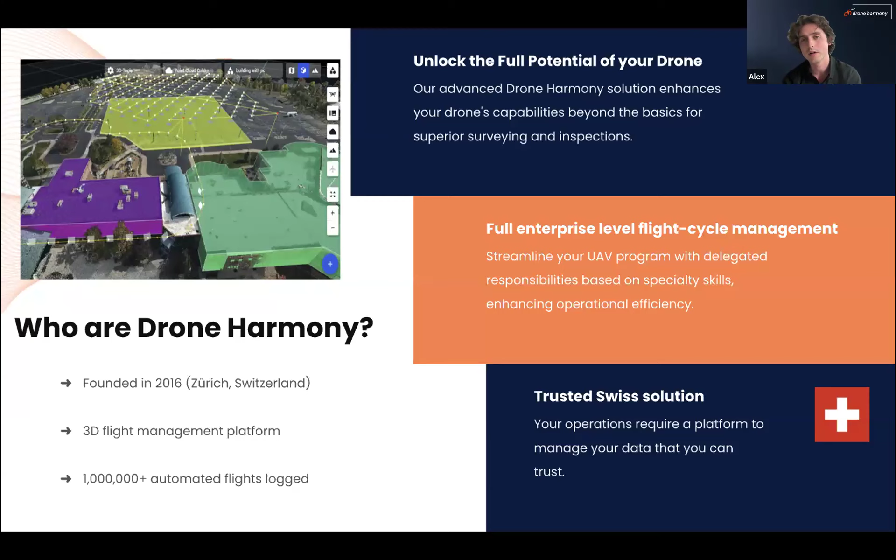We empower all sorts of industries as a software platform. Some of the larger ones we do are utilities all over the world, things like electrical transmission line scanning. We can cover large scale and complex mission planning and also asset inspection. Asset inspection, as some of you will know, is a very delicate thing to do.

These are very sensitive sites, which is why you require a robust platform like Drone Harmony to map them with. Of course, there are many other industries that we cater to as well, such as solar power inspection, construction, mining, public safety, and security inspections.

Now, we haven't gotten to this place all on our own. There are many partners which we use to get here, technical partners and commercial partners. For example, we have DJI, Phase One, Sony. These guys we work very closely alongside with to make sure our product is up to standard with all the latest features and hardware out there.

And we have commercial partners all over the world, and this list of commercial partners is growing by the week. Many, many, many growing in the US, Europe, and the rest of the world as well.

So today, the hardware that we're going to show you is the DJI Dock. Now, as I said at the start of this webinar, there's been a lot of excitement over the last few months about the DJI Dock. I'm not going to tell you any more about it than you've already heard.

The DJI Dock, as a piece of hardware, is changing the drone industry with software platforms like Drone Harmony. The drone industry has been going for around 10, 15 years now. Finally, we have a platform that allows you to have full remote work control of your operations. This is a dock where you can activate and perform your missions 24/7 remotely using platforms like Drone Harmony.

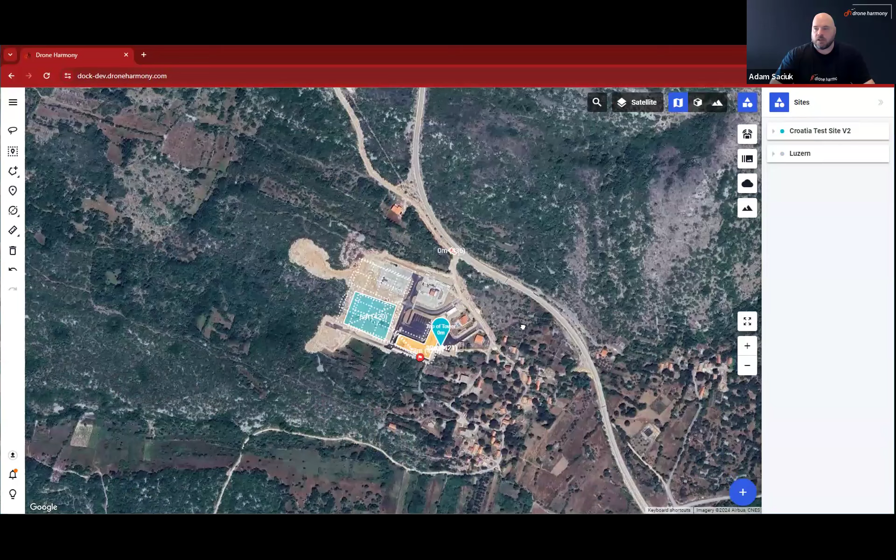So I will zoom in on our Croatia site here, where we come in and see a few different things. I will close down some of these missions and talk about the basics of what planning is.

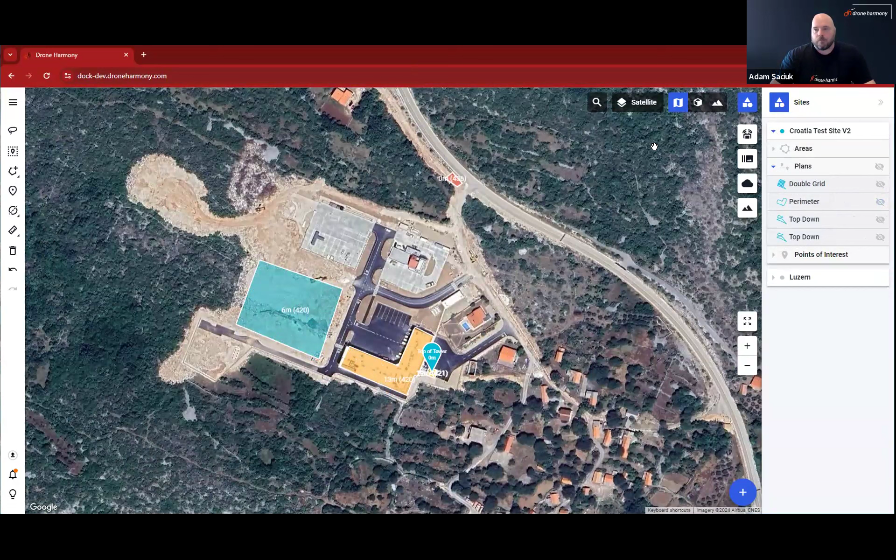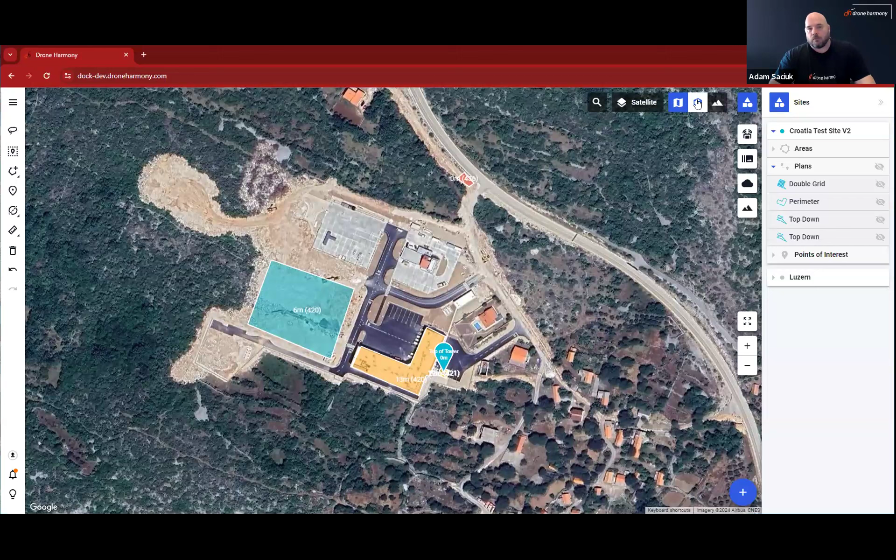Fundamentally, we have our 2D world, which exists on kind of the Google map. It's the same as what everyone has the ability to use. In Drone Harmony, we wanted to go one step further. We were the pioneers of 3D flight planning. So we brought in the virtual world, which leverages technology that's becoming cheaper and cheaper to achieve: point clouds, orthomosaics, and meshes.

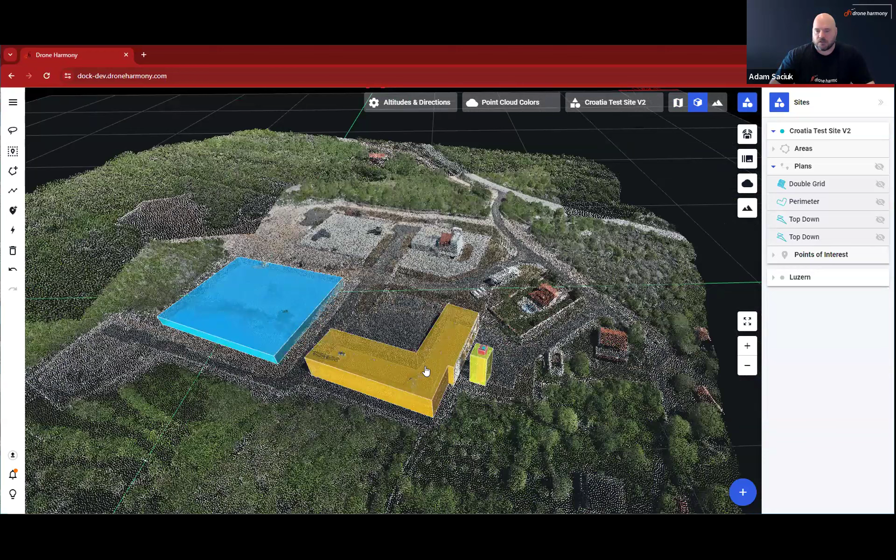So here we have a point cloud of our facility, and Drone Harmony has the ability to create objects in this point cloud. We interact directly in this environment. It's all geospatially accurate. And when we have the dock installed and turned on, we know exactly where it is, so we have our RTK fixed point of reference. The accuracy is all built off equipment that removes the guesswork around where your drone's going to be.

Unfortunately, in this particular scenario today, the dock is not turned on because we have a bit of a torrential storm going through the area, but it won't stop me from being able to show you a planned mission on how you would do this in a virtual environment. I'm quite a long way away from Croatia, but I can operate in this environment like I'm sitting there.

So the first thing that I'll do is create a perimeter mission for this orange building that is there. So what we have done is created a box around that, and we use tools where we create the points of the building. As we go through and create those points, it will draw a shape, and we give it 3D heights.

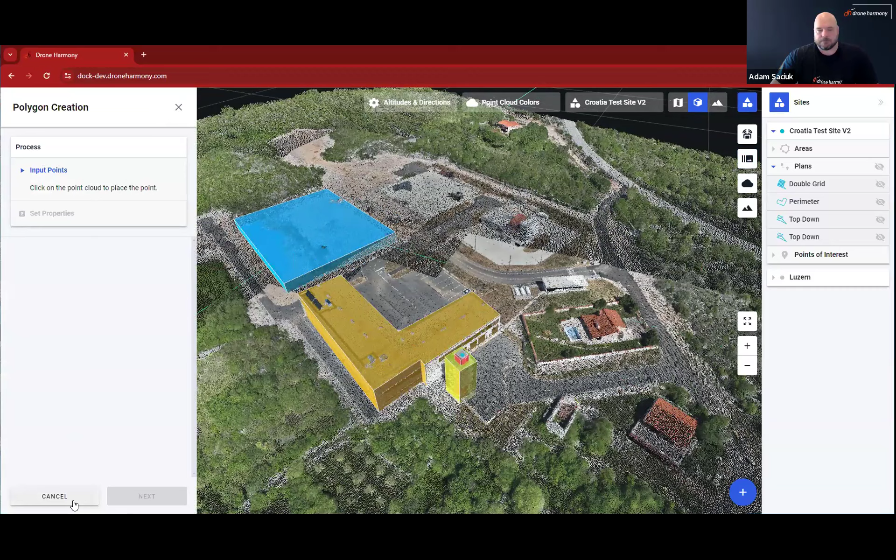So I will close that, and now plan a perimeter mission. In our plan catalog, we have lots of different things: linear missions, shapes, mapping missions, inspection missions. And in this case, I'm going to use a perimeter mission. So I'll pick my orange building.

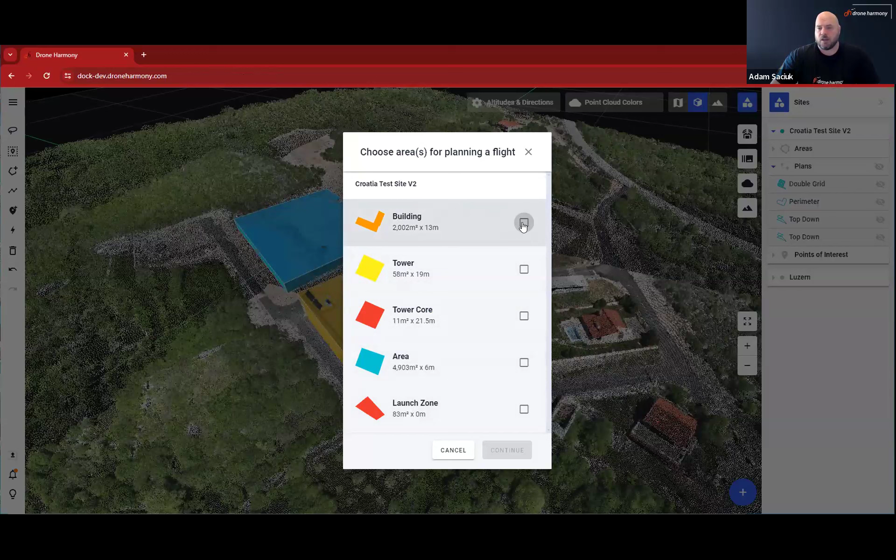These are all customizable. You're able to name these in your own naming conventions. We don't really lock anyone down to a Drone Harmony naming convention; we give you the flexibility to use your own. I'll select that building. Normally, if I had the drone connected, it would know where the drone's going to launch. I know our drone is normally installed over here, so I will just use that as my launch location.

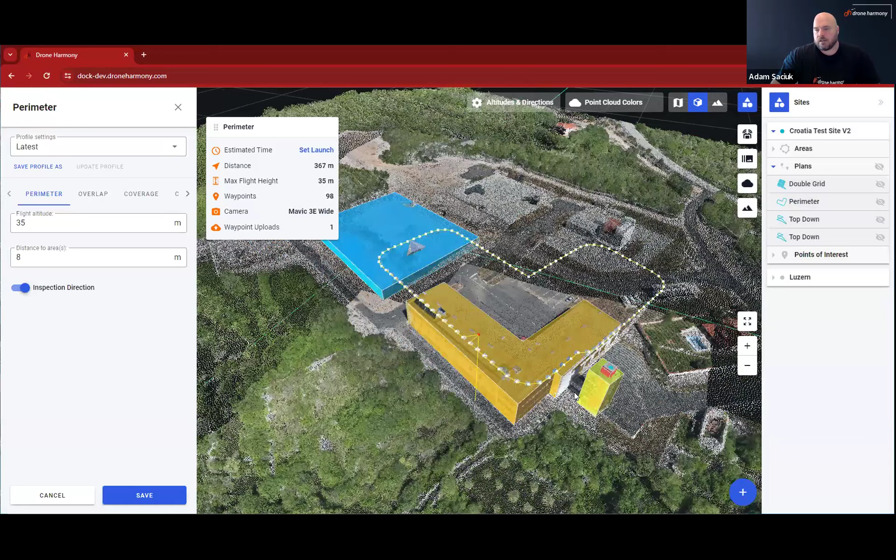And you can now see the algorithms jump into play very quickly, creating a flight mission based on parameters. So I've told it what I'm interested in, and now within 1 second there's a flight mission that shows exactly what we're doing. You can see that the camera is automatically angled. Everything is done through algorithms.

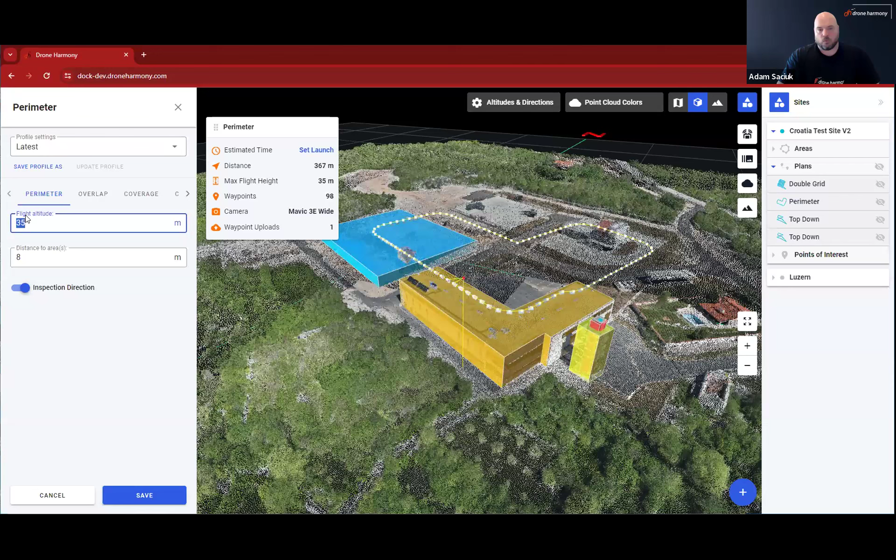So with this type of philosophy, if I drop this down to, let's say, 15 meters, which is probably a little bit low, let's see what happens. We can see that we are avoiding objects here. Hopefully this is coming through on the screen too.

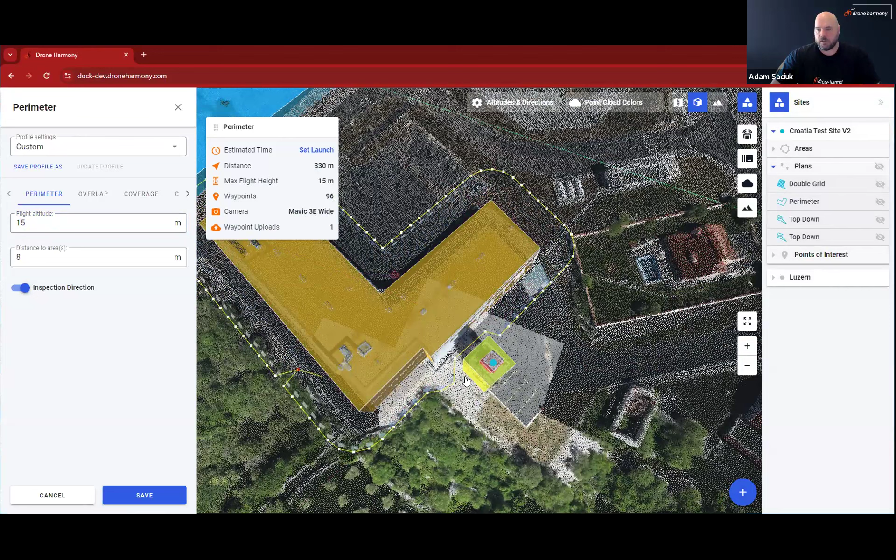You can see what Drone Harmony's done there, in that it's actually avoided that tower obstacle automatically because we had that drawn. Now I can have that mission with the confidence knowing that the drone knows what to avoid. And I can review this in 3D. It's adjusted my visual angle so I can see the structure.

So we'll go back up to a safer height because I think that's maybe a little bit too low, and we might go out a little bit further just to have a slightly better view. So really what we're having the ability to do is preview our flight in the virtual world to make sure that we are getting exactly what we need from this mission. If this is just a normal surveillance mission, when I launch this, I would just use live feed or video. If it's an inspection mission, I'd be taking images.

If I need to change the overlap of the images, we have the ability to do that, and it automatically changes in real time. If there's a part of the building that I don't want to inspect, I can modify that. In this case, I want to do all of it. We can pick the camera that we're actually using.

Because I haven't got the dock turned on, we're reverting back to being able to select this manually. Normally the dock determines which camera and drone we use.

And then we can come in here and start setting launch parameters, which is our flight speed, what I want the drone to do. Do I want it to stop at each waypoint, stop, record video? Which sensors do I want to record? So if I don't want to turn on infrared, and what happens at the end of the mission, and so on and so forth.

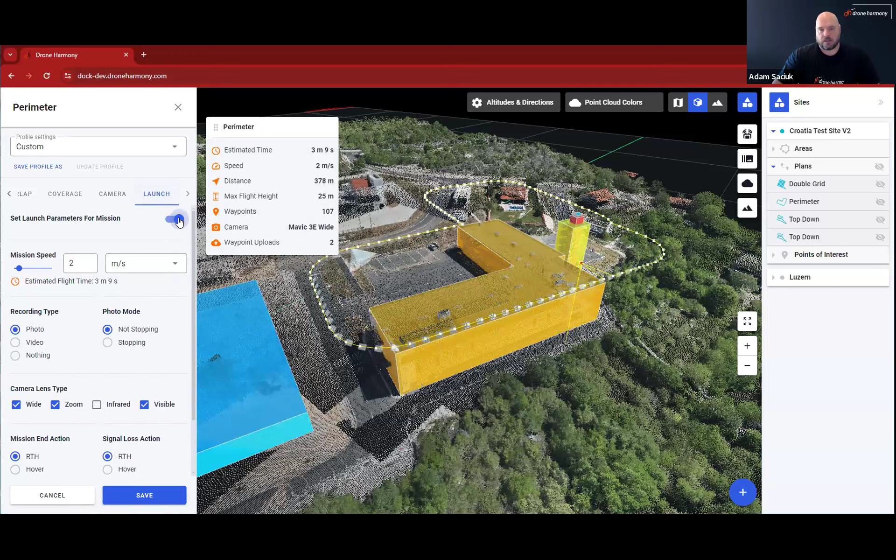So in that instance, I will save that mission and we'll call this perimeter test flight. This is essentially naming, you give it a naming convention based on what is going to be memorable, how your operational team will know what mission that is. So I will save that.

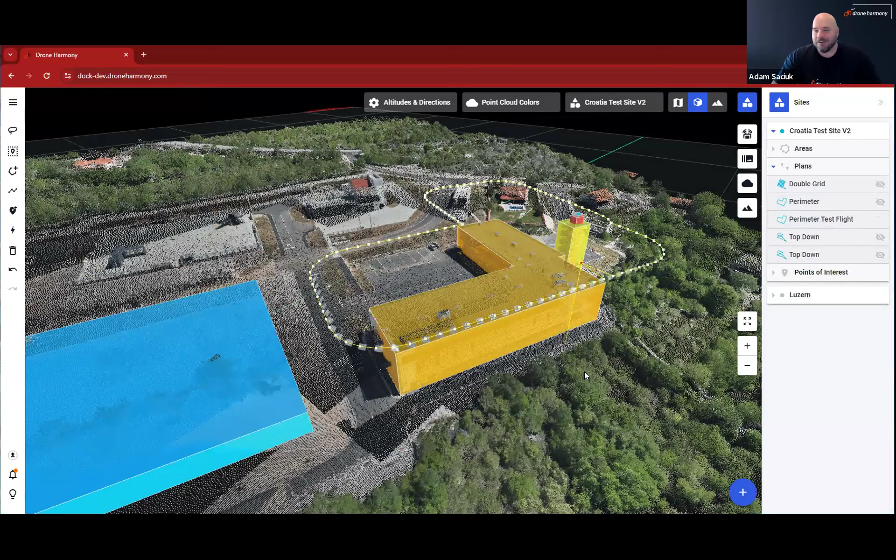And that mission now sits inside our flights, and you can see the perimeter test flight that I just did. The reason why I love this is because it's got a little love heart. It shows how much we love what we're doing there. So that's one of the missions.

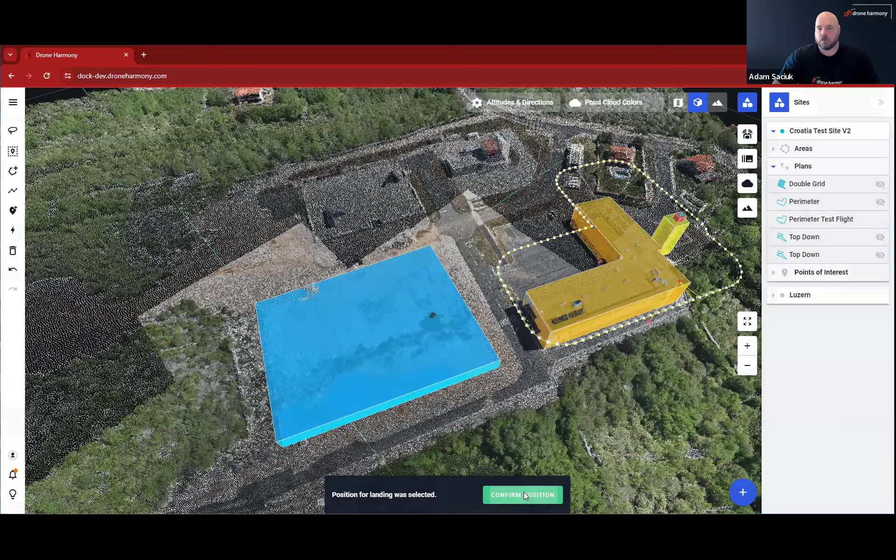Over here, we have another mission, which is just a simulated area of interest. We might just do a mapping mission of that area. Again, we will launch from over in the area where the drone is normally installed. And I'll come down to 25 meters just to make it a little bit more interesting.

And it's integrating, it's creating all of these missions. So again, you have the overlap controls, the camera controls. We can change the pitch and we can schedule the launches for those perspectives there.

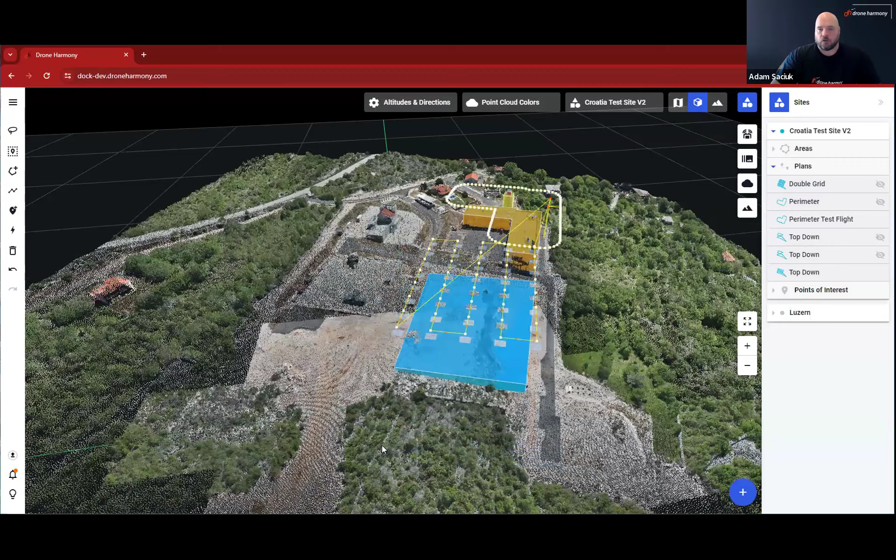So the last mission that I really want to show you before we get into some live demos is how our point cloud actually creates a terrain model. So we have all this great 3D information that comes from near survey grade 3D point clouds.

And Drone Harmony, when it automatically processes this data, you load the LAZ or the LAS point cloud in through our point cloud engine. It will actually create a terrain model in very, very high resolution, showing us where these things are, like light poles. So it's actually creating terrain avoidance obstacles of light poles.

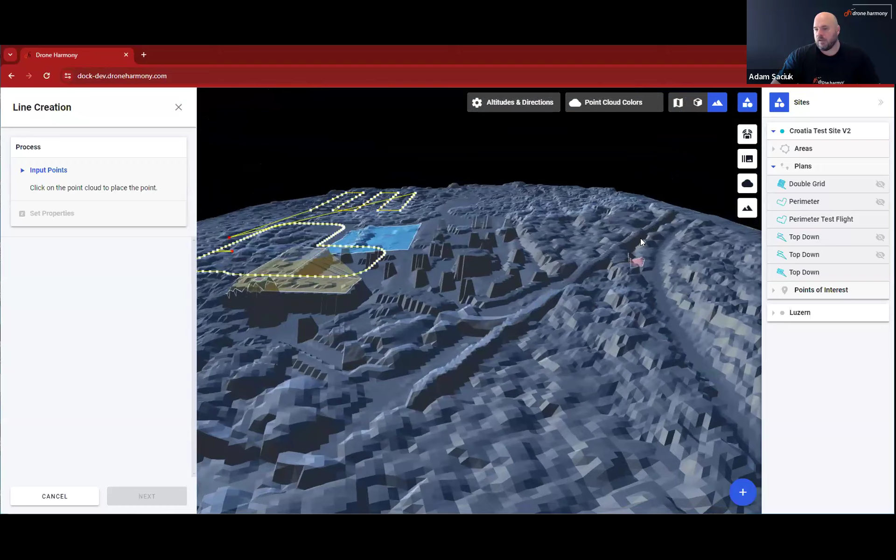We can see there's a transmission power line corridor that runs down there. There's a distribution corridor that jumps off there. So you can see that it's actually created an obstacle world of where all the things are.

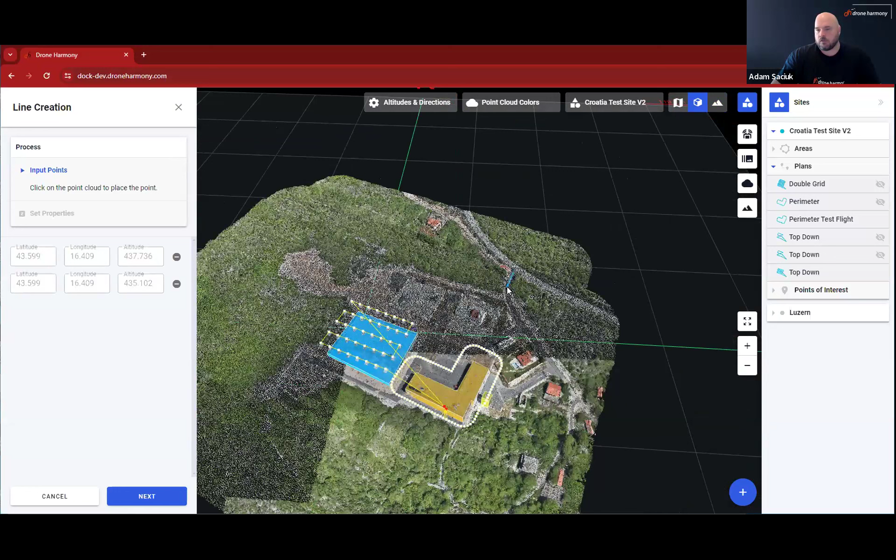So when I jump back into the point cloud view, sorry, it's just taking a little bit to load. I'm going to create a linear mission, and I'm just going to draw it along the point cloud.

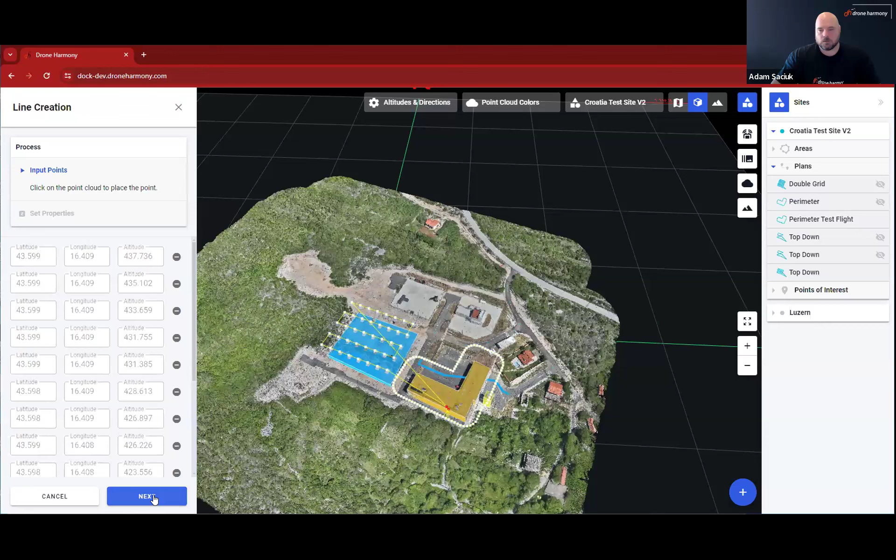I'll go back up here. I'll go straight through the building, and we'll finish over here. Make it red so it stands out. Okay, so that's the mission that I'm interested in.

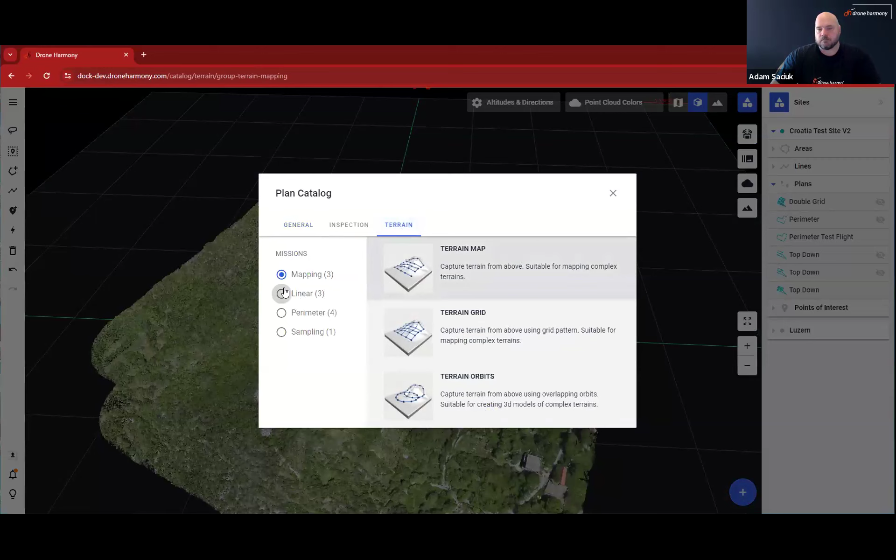I want the drone to fly along that pathway. It might be a road, it might be a perimeter of a building, and I just want to do a terrain flight. So I'm now going to use my terrain data, and I want to do a linear path.

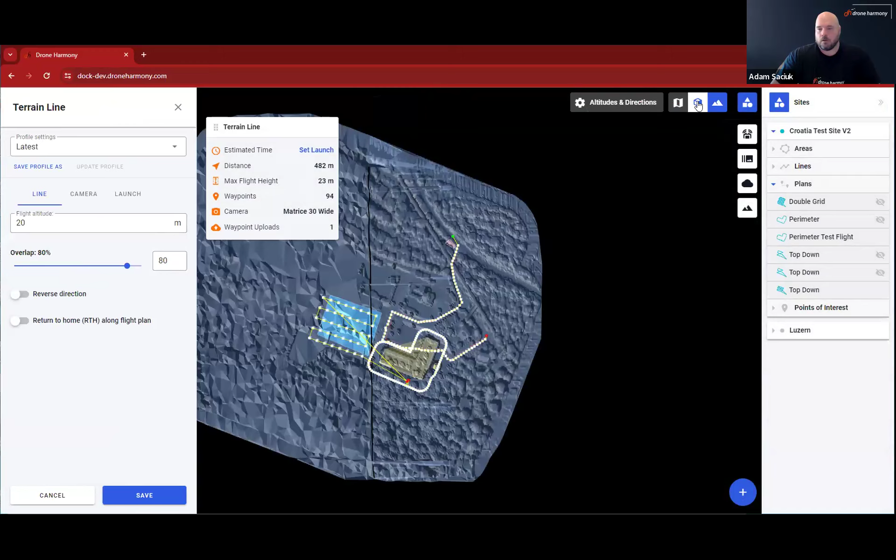So I'm going to launch from over here because it just makes it a bit easier. Normally you would launch from where your drone is installed. And I want to land over there. And I will go back into here, turn my perimeter mission off, turn my top-down mission off.

And I am going to have it a little bit higher. Let's bump it up to, say, 50 meters.

And you can see that the flight path here, as we're planning it, it's using the terrain model to adjust the obstacles. So it's flying over the top of the buildings, even down here where the transmission corridor goes. You can see that it's actually increasing altitude a little bit just to make sure there's enough space operating it.

And what this does, it gives the pilot and the planner the confidence that when you plan a mission, the drone knows the real world as you're flying this.

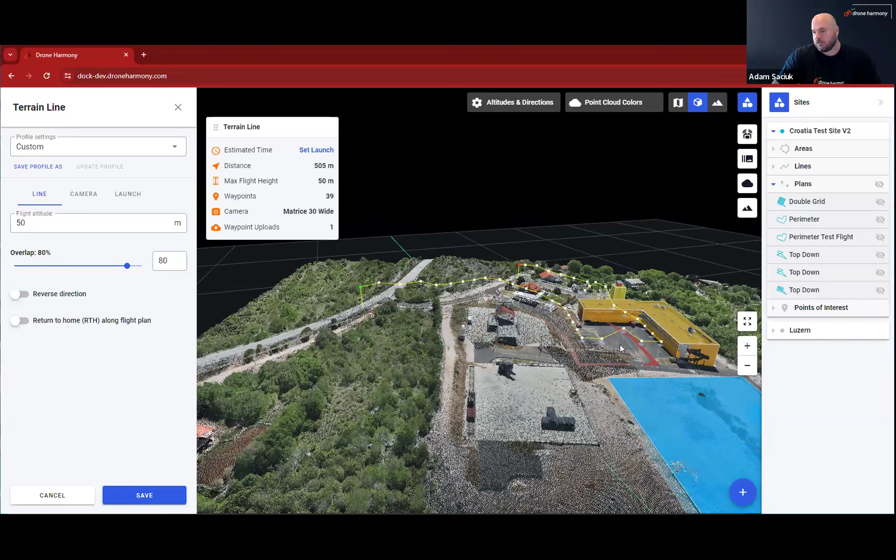This is an interesting one. There's a light pole directly underneath this. So it's just making sure that it flies above the light pole and it's following the terrain that we do there. So if I save that mission...

You'll see how it has quite an odd shape rather than just the straight line.

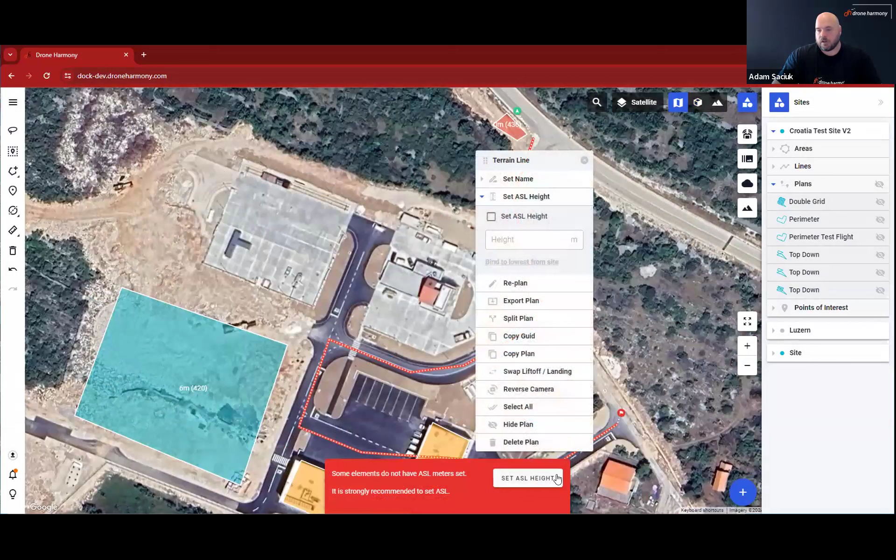And all of this is referenced back into here, and you can start adjusting waypoints as you please from that perspective. So those are the different types of missions that we can do.

All of these missions get saved. They're controlled by a site that sits in an enterprise account, and then they're executed when you've actually got the drone installed. They get executed based on a predetermined schedule or on an as-needed basis, and we'll show all the different functionality of the drone control operations as we step through this.

So, Alex, I think that's probably the basics of planning that I wanted to show. And I think everyone's here to actually see the drone operate and start flying around some of our test locations.

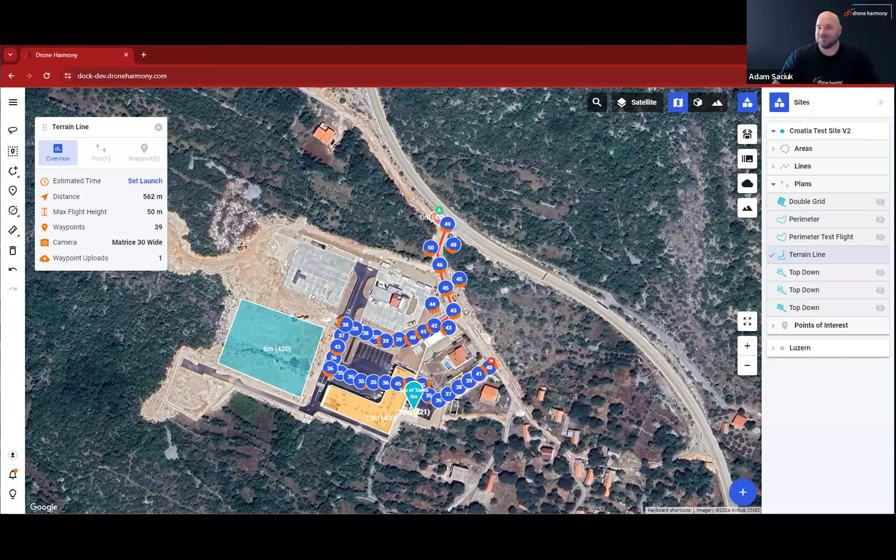That's really neat, Adam. Thank you for that. I've actually got a bunch of questions myself that I want to ask, but I don't want to hold the audience back from seeing a drone flying any longer. So, sure. David, do you want to take over? Adam, did you stop sharing your screen? David, certainly, take over and share yours.

So, as Adam said, the weather is very, very bad in Croatia today, which is part of the risk you run when you try and do an experimental webinar. But that's okay because we've got drones docked in Luzern and in Finland as well, so we're going to be able to show you one of those.

David, do you want to share your screen, please? Yes, with pleasure. I'm gonna pop it up right now. Just give me one quick second. No problem, should come up now. Is this coming through? Yeah, we can see the map of Europe. Okay, sounds good. So yeah, let's do some flights, some concrete flights.

So here is the little site where Adam was showing some of our flight planning capabilities just now. And as was mentioned, the weather there in all of Croatia is not ideal. So we will actually be flying into other sites, one being in Finland, and the other one in Switzerland, in our, let's say, home base.

We'll start with the dock in Finland. So let me switch over to that site. By now we've seen a little bit of how the Drone Harmony interface looks like. We know that in a dock case, we usually have both 2D information as well as 3D information about our site.

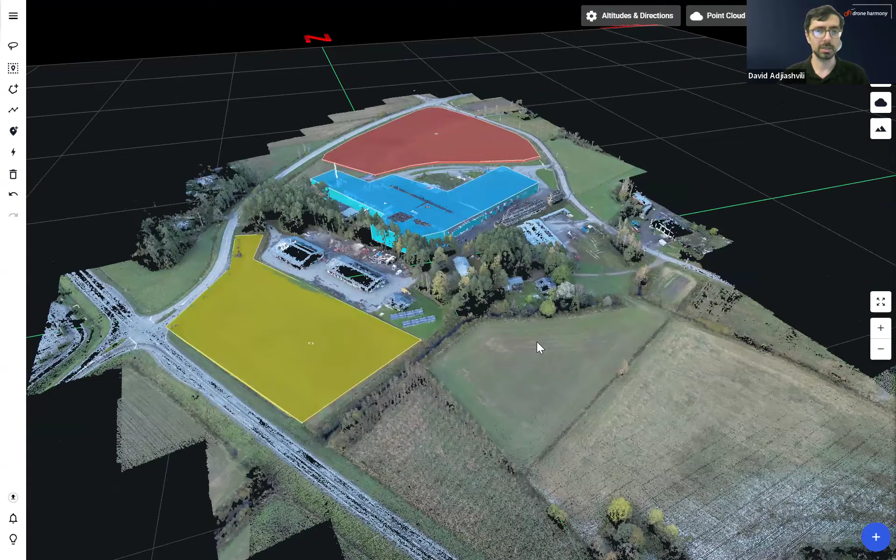So just to introduce you a little bit to this specific site, it's in Finland, and this is where we're gonna do some of our fun flight drone dock flying. I will actually start with planning a new mission, just so we see the whole workflow in this site from the beginning till the end. So just as Adam did before, I'll pick one of the buildings, for example, this blue building, and I'll just plan a quick perimeter mission for it.

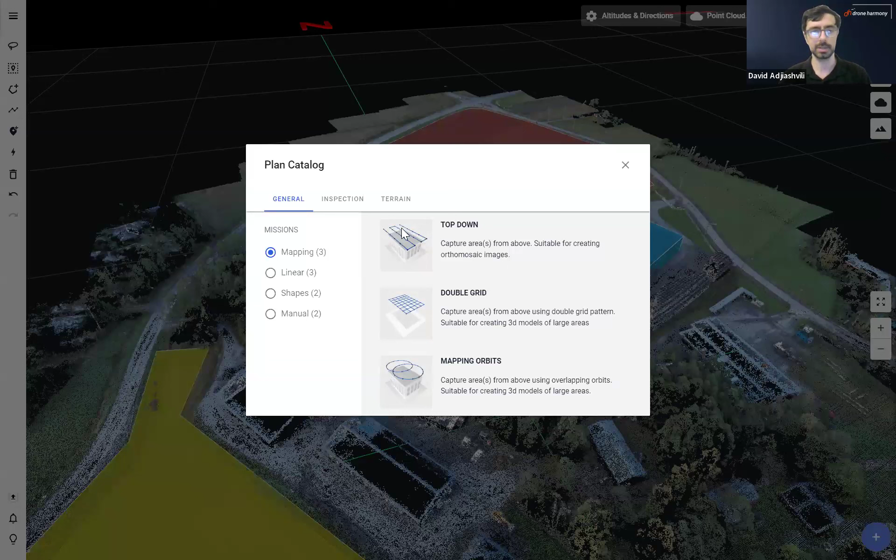So the same workflow: I go to the plus here, I'll pick inspection as a category of missions, and then perimeter. I'll pick this main building as the subject of my inspection and continue. So here, immediately we get a suggestion for an inspection for this building.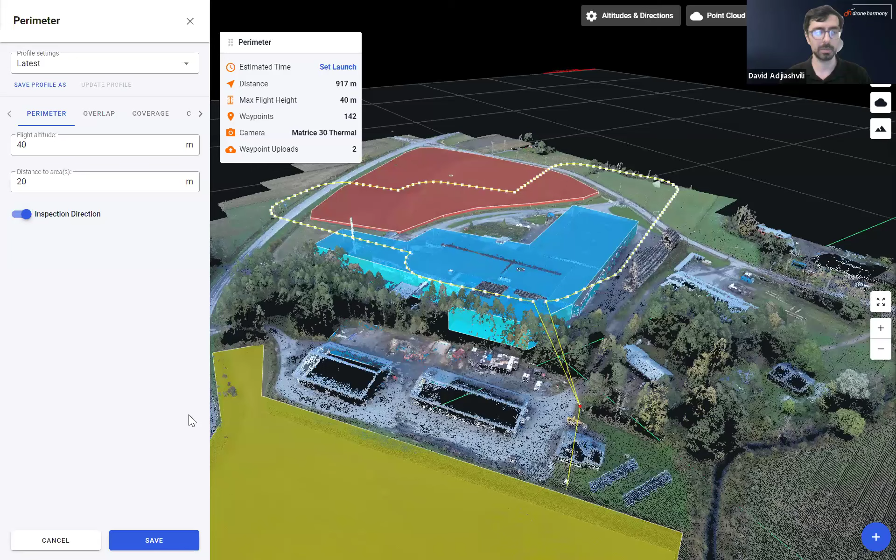You will see how the takeoff location has already been identified, and the reason is that this is a dock site. We have actually a connected DJI Dock here, and the takeoff location is being identified as the location of that specific dock. On the left, we can adjust parameters, flight altitude, distance to the structure. I actually like the current settings, otherwise I would be able to adjust them. I'll just save this mission right now and call it perimeter.

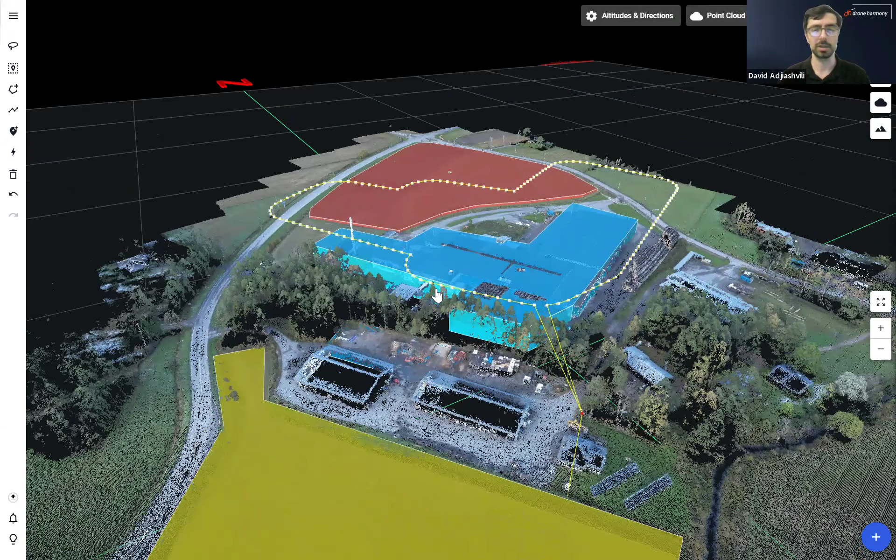So that's all fully automated, isn't it? That mission plan wasn't done in advance - as soon as you hit select, that's coming automatically, hasn't it? Yeah, that's correct. I've actually cleaned up the site before just to be able to do everything from scratch. And if I would adjust anything about the building, it would create the mission according to that new shape of the building, or that new shape of the 3D virtual world that we're looking at.

So now that we have the mission, let's fly it. This is the first time we'll start seeing some dock related elements. There's several ways of launching a mission in Drone Harmony - I'll show you at least a couple.

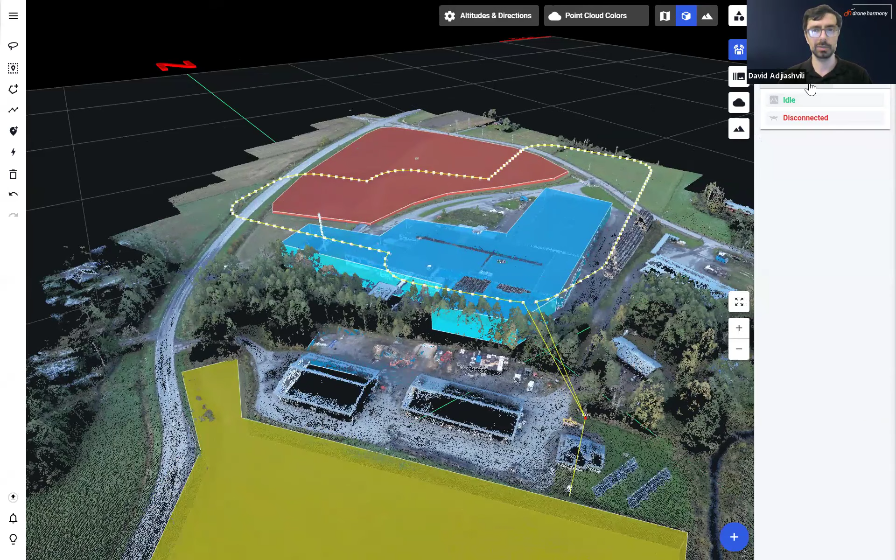So one thing we can do is we can go here to devices and just open the specific device we want to launch a mission from. You can see this little panel here appears on the top right. We can move it around to anywhere in the screen where we want it to be, but this is actually a good position for me right now.

What you will see is immediate access to FPV view. So at the moment we'll look at the dock FPV, and we see a little bit of telemetry here on top. This is actually the drone telemetry. The drone is currently off, so before speaking too much longer about telemetry, I can talk about it while the drone is preparing to launch the mission.

I'll jump straight into launching this perimeter mission that we've just planned. One way to do this is to press launch mission for the specific dock. In this case, I have one mission on the site, so we jump straight into the launch parameters. Otherwise I'd have an option to pick what mission I want to launch, maybe we'll see that later.

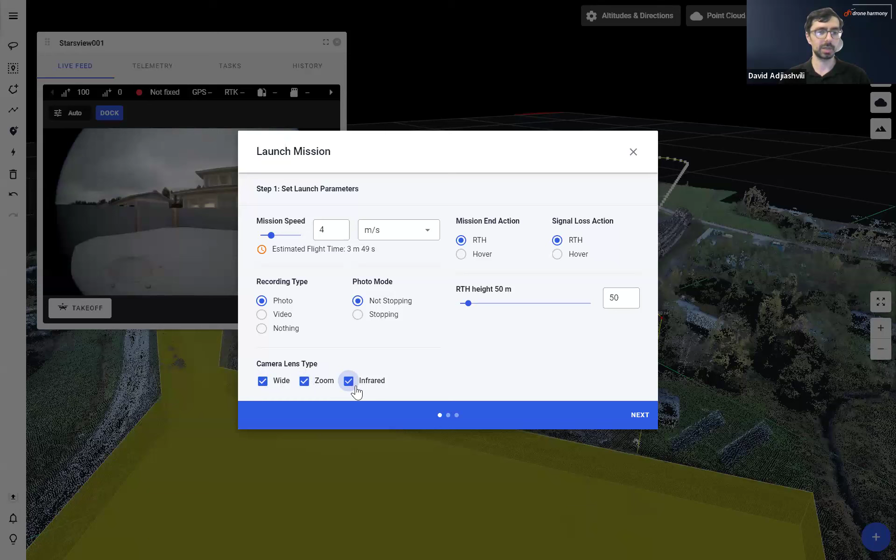Similar to how we could pre-plan parameters for missions, here I can look at whatever was pre-planned for this mission and adjust whatever I want. Mission speed is an important parameter, return to home altitude is an important parameter, as well as what we're actually capturing. So all of the important parameters are in here, for example what image data will be captured. In this case, let's keep all of these ticked, both wide as well as infrared and zoom. If we're happy with the parameters, we go to next.

We pick the type of launch. So now I'll launch a mission immediately, some kind of ad hoc launch as quickly as possible. We could also schedule - if I go down here I could schedule and choose between several options. For example, I want to launch a mission tomorrow at 5pm, or I could schedule daily or weekly on a specific day. So there's a lot of flexibility, we can have several schedules to create any type of drone flight schedule we want. But again, we want to do immediate right now.

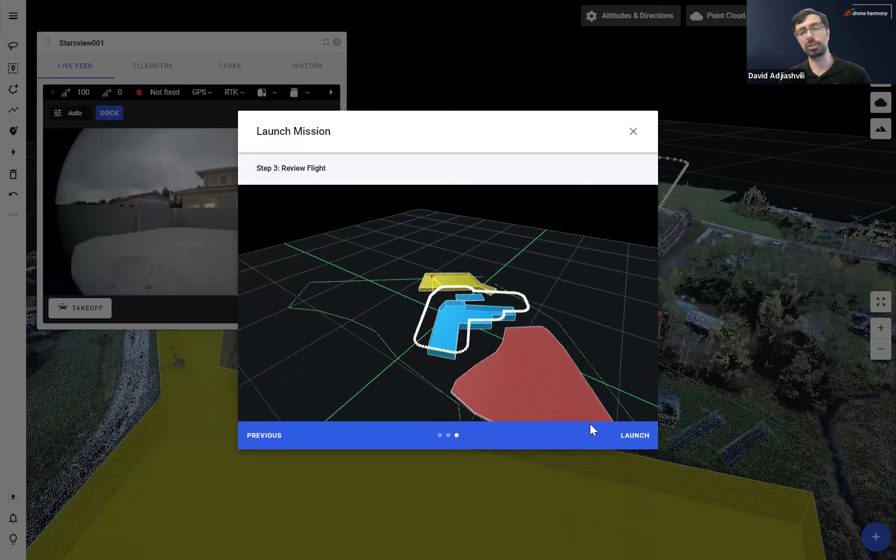Next, I get a quick preview of the mission that I'm actually planning to launch. This is useful because on a Drone Harmony site we very commonly have more than one mission, and we don't only want to rely on naming. Sometimes we also want quick visual feedback that we're launching the mission we're actually intending to launch. So I'll press launch, and now the launching sequence should start.

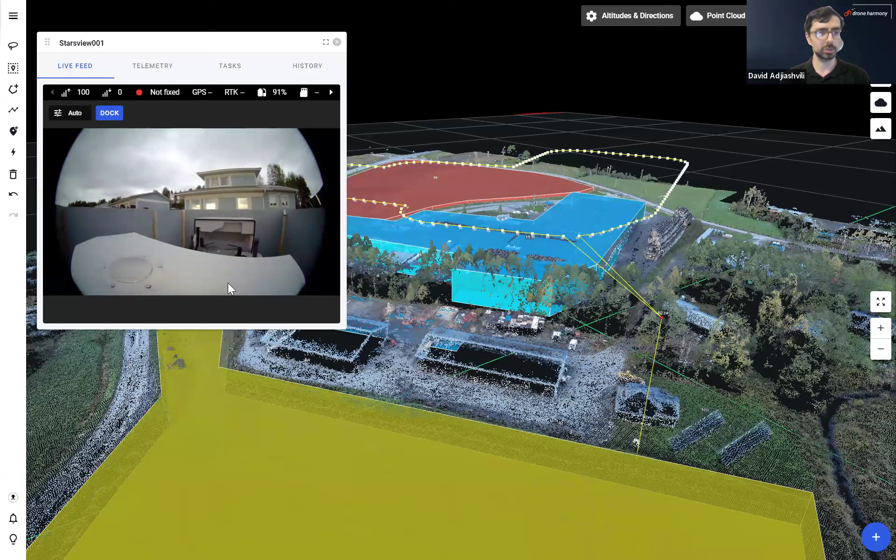While that's happening, I'll continue talking about the dock panel that we have within Drone Harmony. You'll see that the dock is already opening, the drone will start, turn on, et cetera. Those of you who know a little bit about DJI Dock will recognize that this is a Dock 1. We'll also launch a Dock 2 in a few minutes.

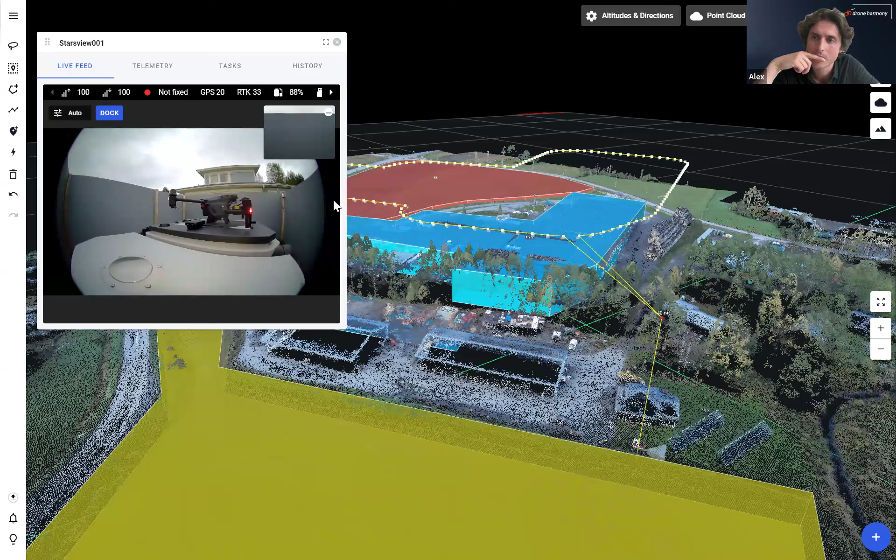Just to confirm this, because I find this absolutely mind-blowing - you've planned this mission on the cloud in Switzerland, and now we're activating it in Finland. So when you've pressed launch, the data for this flight plan has been sent to this dock in Finland. Yeah, exactly how it is. There's really no kind of geographic boundaries here - we could have had Adam launch this mission, he could log into the same account. It really doesn't matter where you're doing it from. You can do everything from loading up the point cloud, creating the objects of interest, planning the missions, launching the missions, viewing the data, everything right here. You don't have to do anything locally.

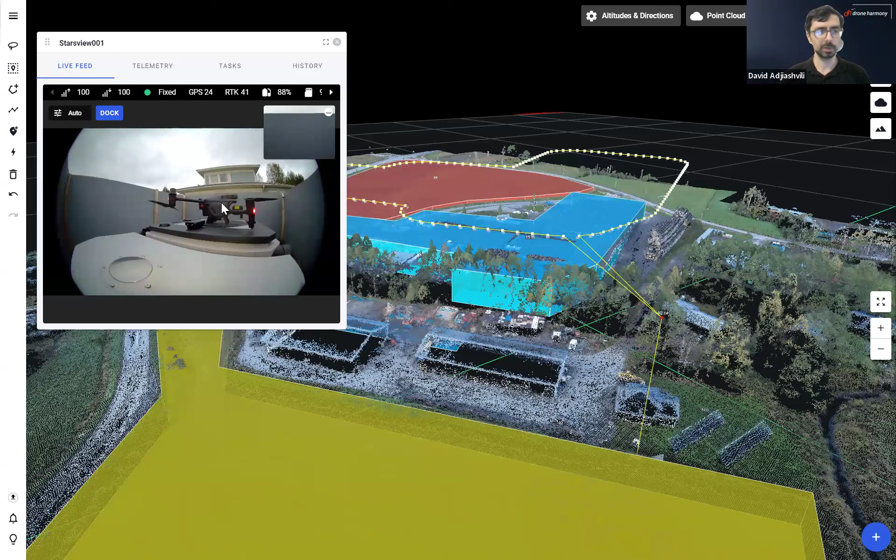As we've spoken through this, we now actually have GPS lock, so essentially the drone is ready to launch, and it will launch now. And you see that the drone just took off. Now I have an option to switch views - of course I don't want to be looking at the dock's FPV while the drone is flying, so I can switch here to the FPV view of the drone.

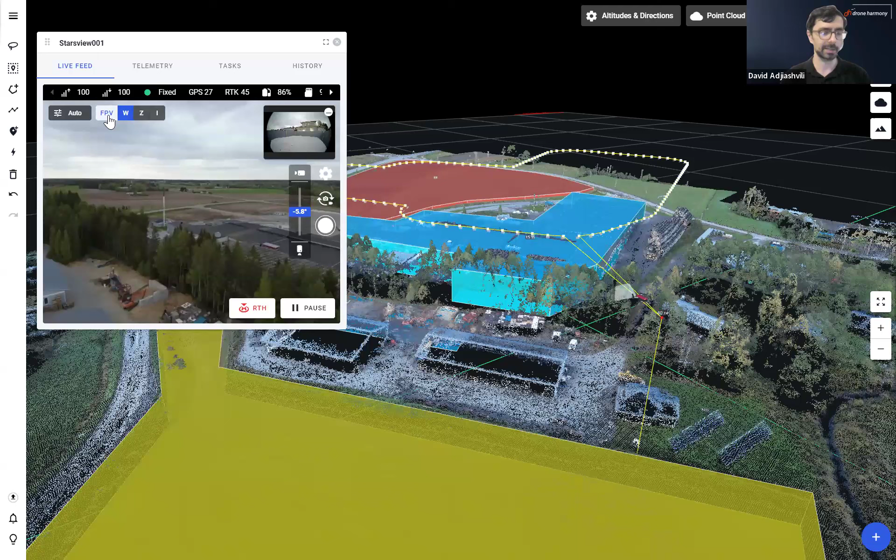Within FPV view, I have access to various payloads - I can look at FPV, wide, zoom, or thermal for this specific flight. Pay attention that this is not really the data that's captured - the data that's captured has been pre-programmed to be, in this case, all of these payloads. It's just from which viewpoint I want to look at this data. For example, if I switch to thermal, I'll be observing the flight through the thermal camera, as you can see, or if I want zoom, I can switch to zoom. So let's go back to wide.

Appreciate another fact that in this 3D world we're seeing, we're actually seeing the actual position of the drone during the flight. The drone is being presented to us where it's currently at in the virtual world, and that gives us enormous control over knowing where it actually is.

In a moment we will also pause the drone and start moving it around manually during the mission. That's very valuable because instead of just guessing where we are looking at FPV view and map, we can also rely on this very powerful 3D visualization.

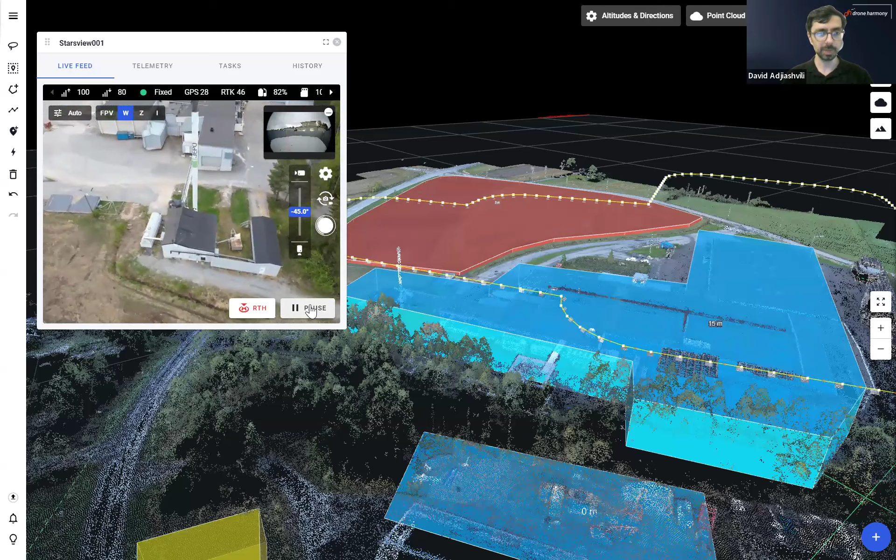As I've been speaking through this, the drone has reached an interesting place. Let me just pause the mission here. So I paused the mission, and you see the drone isn't moving anymore. It's hovering in space, and I have a few options at my disposal here.

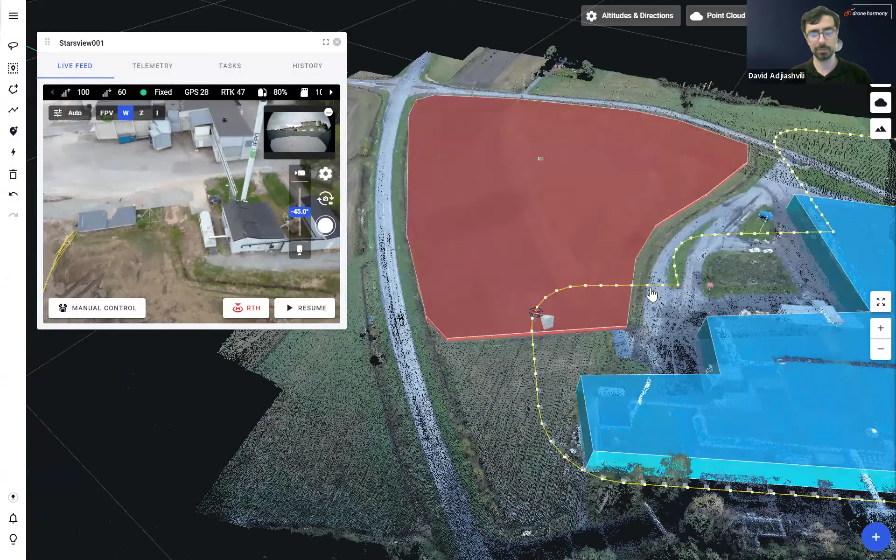Let's first scroll over in 3D to where the drone actually is right now. You'll see it's positioned here. Let me quickly arrive at that location conveniently like that. Now the mission is paused. I can, of course, return to home, resume, or for example, take manual control of the drone at this point. So let me do that.

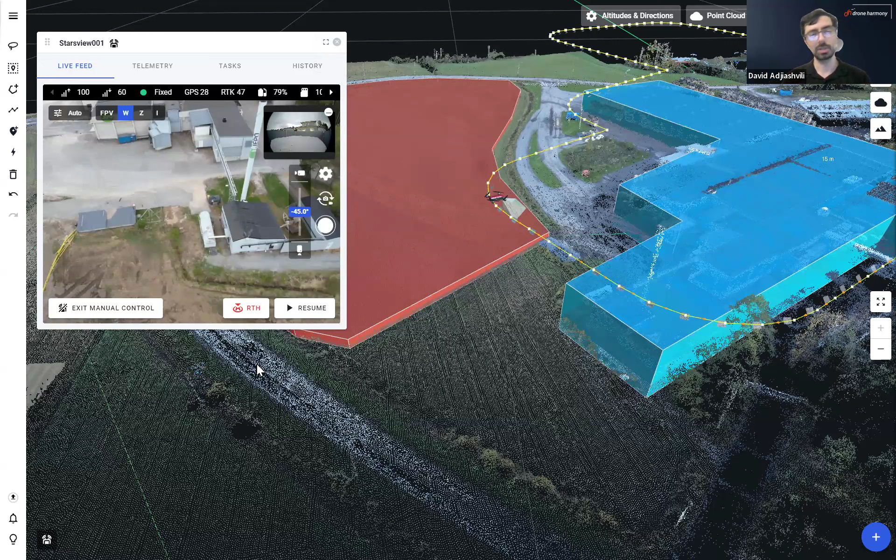So I press on manual control, and here is where we can start combining the value of things like automated missions as well as situational awareness or ad hoc inspection type use cases. So I've now got full control of the drone.

I can, for example, move the drone with my keyboard or with some other external UI device. So you see how I'm just flying the drone left and right, back and forth, etc. This is me controlling the drone from Switzerland.

Now let's see why this can be valuable. Let's say there is this chimney here, and I want to look at the top of the chimney. So I'm just clicking on where I want to focus, and let me switch here to the zoom camera.

Let's say we noticed in FPV view that something is going wrong in this specific chimney. So I'm just interested in pausing the mission and quickly zooming in to see what's going on there. All of this is possible. I can very easily go all the way to that level of detail and see what's going on.

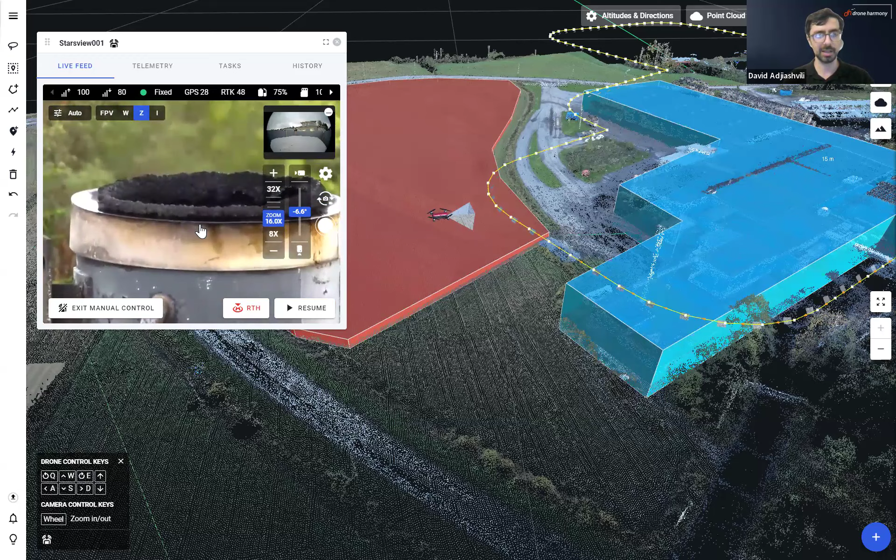Now let's say everything is fine here. Let me zoom back out and look around to see if I find any other issues that I might want to focus on. So I scroll a little bit to the right and click on another thing I noticed on the roof. Let's zoom on that and see if there's an issue there that needs to be addressed. Okay, I'm happy with the way things are, and I'm maybe ready to resume the mission now.

So let's switch back to wide and press on resume. It asks me, are you sure you want to resume? Yes. And this is where it's really powerful—I didn't really stop the previous mission. The data that I planned on collecting will be collected.

Think of this as an inspection mission, but it could also be a mapping mission or something similar, where it's very valuable to gather an entire data set. So me pausing the mission didn't interrupt it—it just temporarily paused the flight, not permanently, so I can now continue and collect the rest of the data.

So other cool... sorry, David. So that data, once you get back, will be organized in the folder as if there was no interruption anyway?

Absolutely. Okay. So I can pause here another time just to show you another type of intervention that you might want to do.

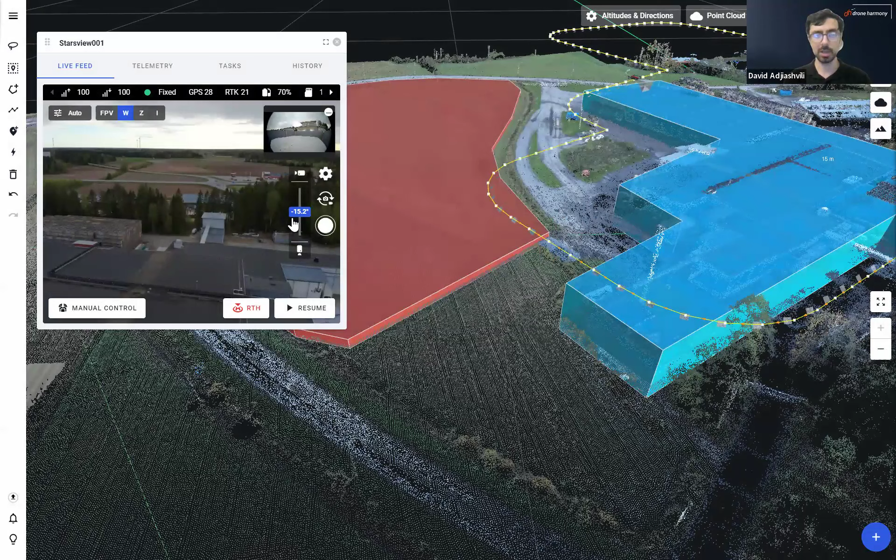You might notice in the FPV view or somewhere else in the 3D environment that you want to inspect something up close from the top. You don't want a sideways view, so maybe you know where it is on the map, and you might want to switch to map view.

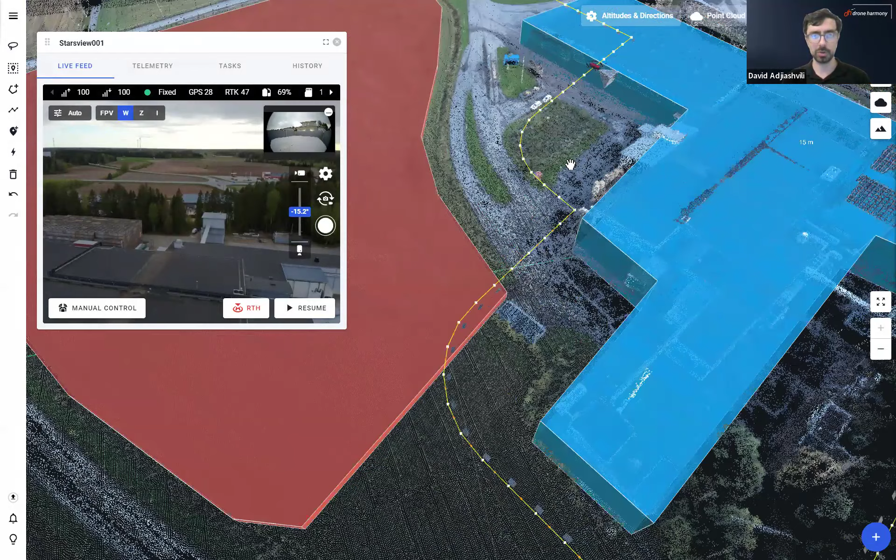And here in map view, you see the drone icon is also presented on the map. You might want to fly somewhere you notice something specific and just bring the drone there—you don't want to create a mission for that, and you don't want to fly there manually.

So that's very easy to do as well. You just right click and do fly here. You might adjust a few important parameters, but for the most part, you just tell the drone to get there as quickly as it can, or at a predetermined speed, and it will execute that mission for you. Maybe at that specific location there's something we notice on the ground, and we want to get there as quickly as possible to inspect it.

So the drone will now arrive, and here we'll tilt the gimbal all the way down and switch on to zoom, zooming all the way down because we want to inspect something on the ground. So just a few more things that I think are very noteworthy.

We've been looking at live feed all the time, and we looked at manual control and camera controls. There's, of course, a full telemetry of the drone available at a separate tab, as well as tasks. Tasks are those missions that are either ongoing - you see we have a perimeter mission that's an immediate launch, currently paused.

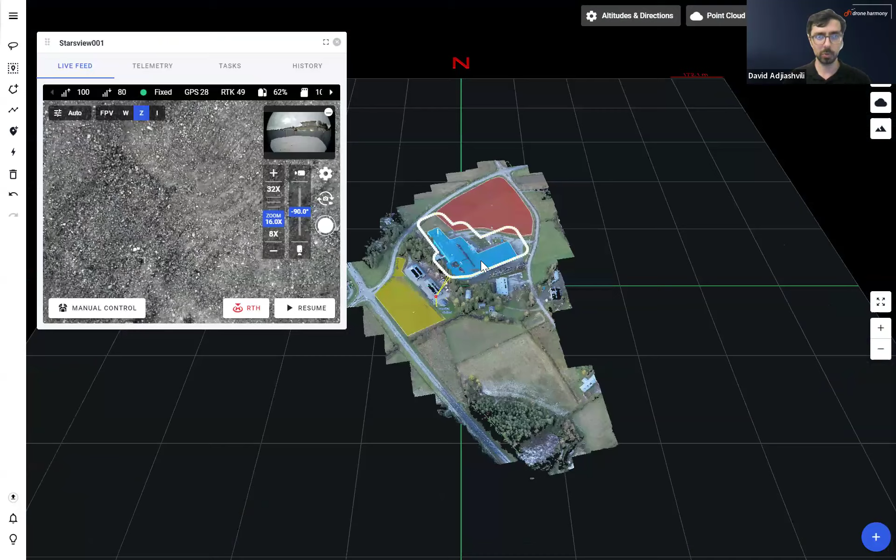This window can also be full screened in case we really only want to look at live feed and the mission should be fully automated, for example. So everything can be full screened here, that's not a problem. Okay, so let's go back to 3D view, the view where the most exciting information exists.

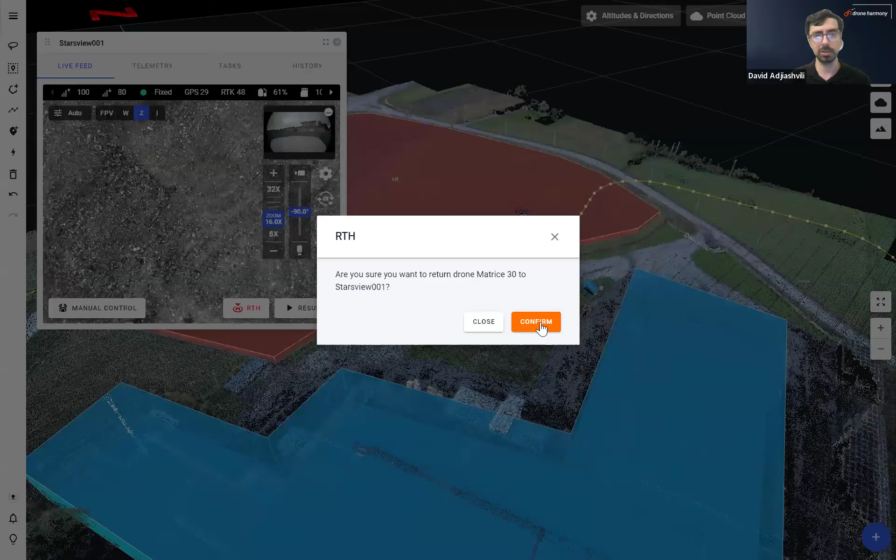And we'll just have a look at where the drone currently is. It's right here above the point we asked it to fly to. Now I can resume the mission, or I can also return to home. So for example, if I decide I need to return to home, I just press return to home and the drone will perform the RTH.

So that's another option we always have. And as you can see, the drone will now go to the RTH altitude that was pre-programmed and will fly across towards the dock site.

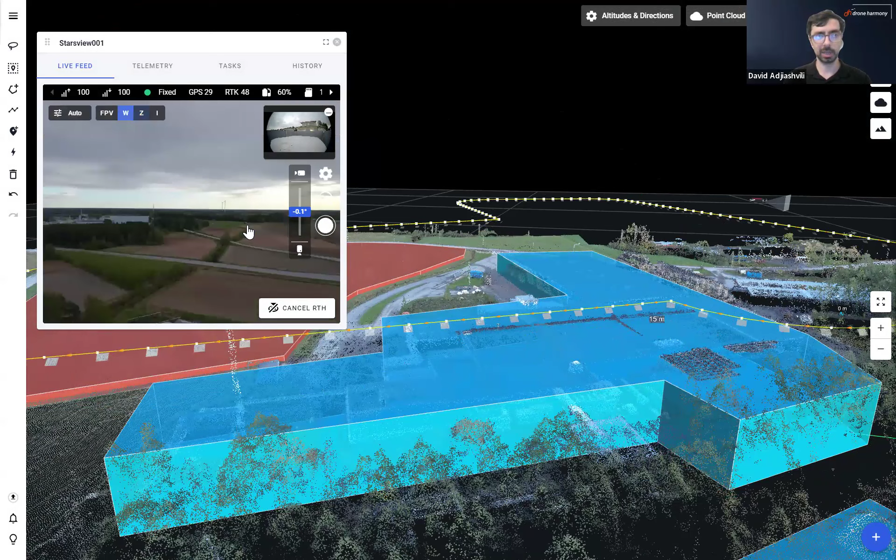And just for fun, as it reaches the dock site, we can have a quick look at how amazing DJI drones can land into boxes, and just tilt the camera down as soon as it arrives. So that would be our interaction with the dock in Finland.

And as we see this drone landing, I will switch gears towards the other dock that we would like to quickly launch, just to see how that would look like.

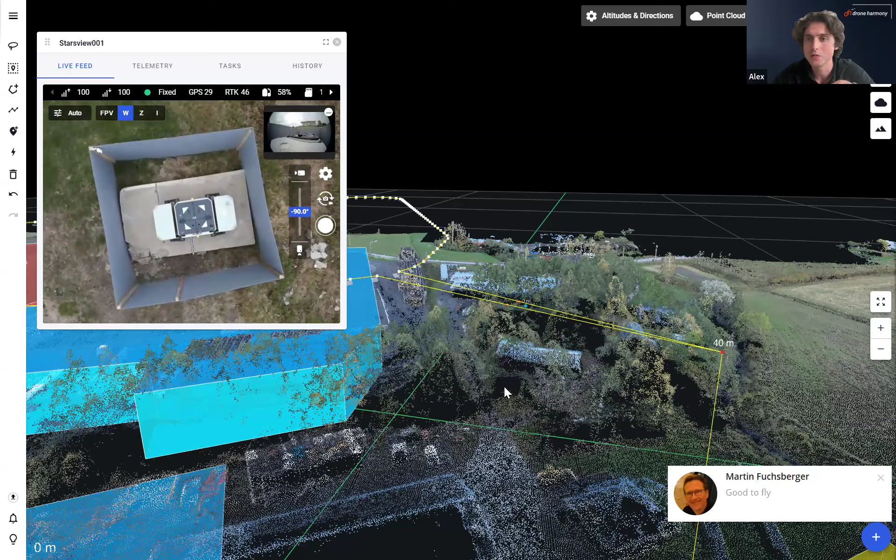And of course, all those manual control features in flight that we've just seen, they're not completely necessary, right? A lot of users will just want to perform large missions of particular sites, set them up, and sit down with a cup of tea or coffee and watch it go. They don't really need to take over like that. No, that's just the flexibility you have.

You can - we expect in most cases most missions to be automated, and you'd be able to just review your data once the drone has landed. It's also important to note the upload of the data happens as soon as the drone lands in the box. So you can expect between a few minutes to, let's say, an hour later, depending on how much data was gathered, to have access to the data through the interface.

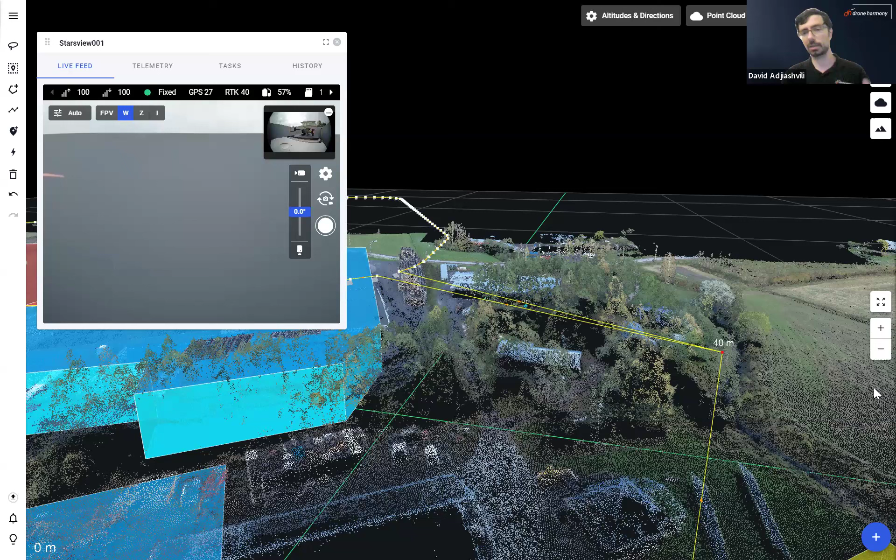Nice. Do you want to, so we've got about 5 more minutes of demonstration, maybe. Do you want to jump to the site in Lucerne just to show the attendees the multi-dock functionality of the Drone Harmony system?

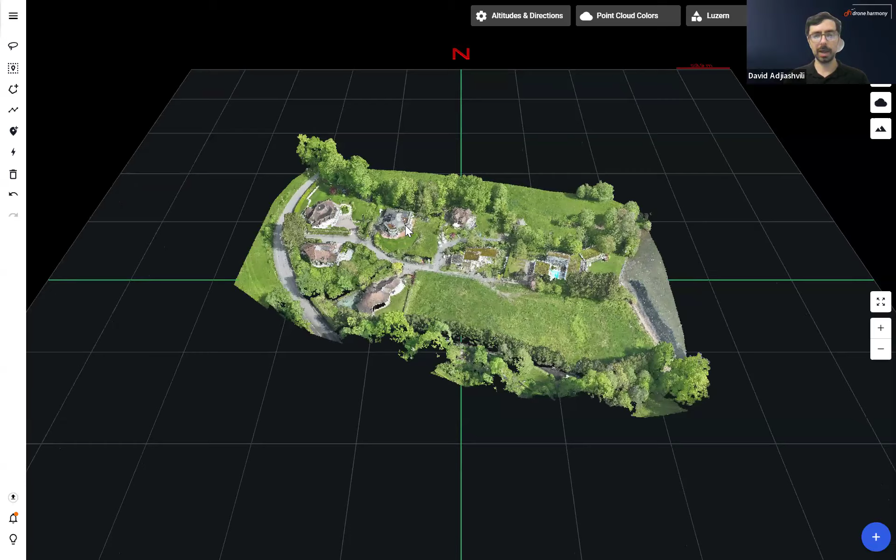Yeah, of course. So here we're now at a different site. You see that this is more of a residential area. There's a dock sitting on the roof of this specific house. And here I'll now open up the dock panel, and you'll see that I actually have a number of docks linked to this specific account.

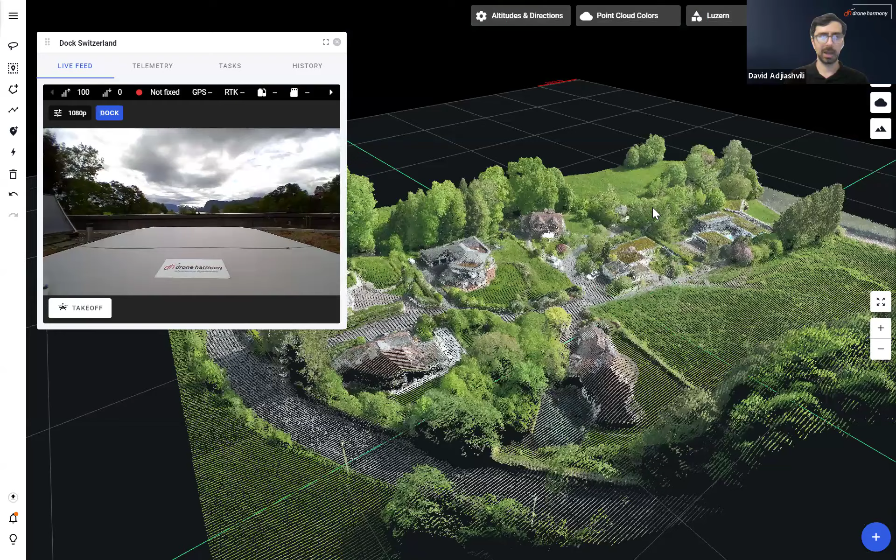One of the docks is the one we planned most of our demo on today in Croatia, but as we've already discussed, weather did not permit. But it's no problem, we have enough other docks where we can perform those types of demos from.

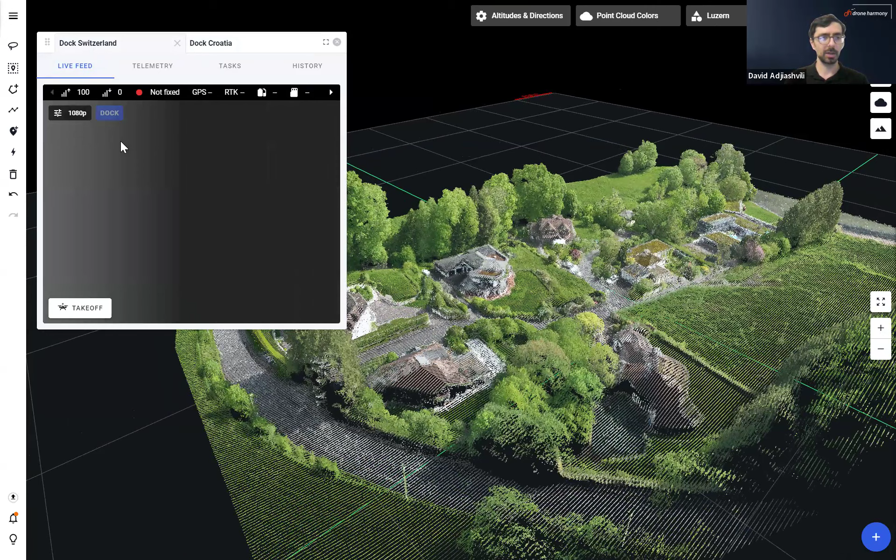What I'll do here is quickly show you what it looks like when more than one dock is connected. So one thing we saw is they just get listed in our panel, and apart from that, they also get tabbed here when we open them. So this one, as we just discussed, is disconnected, but that's not a problem because we have our Dock 2 that is in Switzerland that we can quickly launch and have a beautiful view of the mountains in the Lucerne area. So that's a little bit of free virtual tourism for our webinar participants.

The way I'll do it here is I won't use a mission, I'll just use the takeoff feature, which just launches the drone and immediately allows me to manually control it. So this is more like a video game style, I guess, full manual. The launch sequence is automated, but after that I have manual control. If I wanted an automated mission, I'd have to plan a mission here and launch it, but this is full manual control.

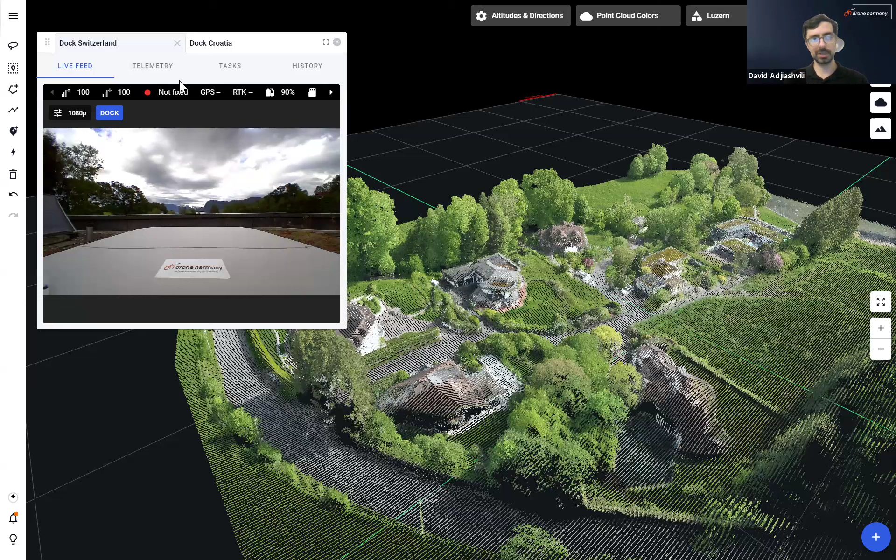As usual, there's a few seconds, up to a minute or two, to wait for the system to load and launch the drone. So here you will see this is a Dock 2. Let's switch to FPV view from the dock. It looks different to those unfamiliar with it, this dock is a bit smaller, more adapted for mapping type use cases, and easier to install in smaller areas, like on a house. So you see the dock has appeared already, and the GPS fix has been achieved. The drone should launch any minute now.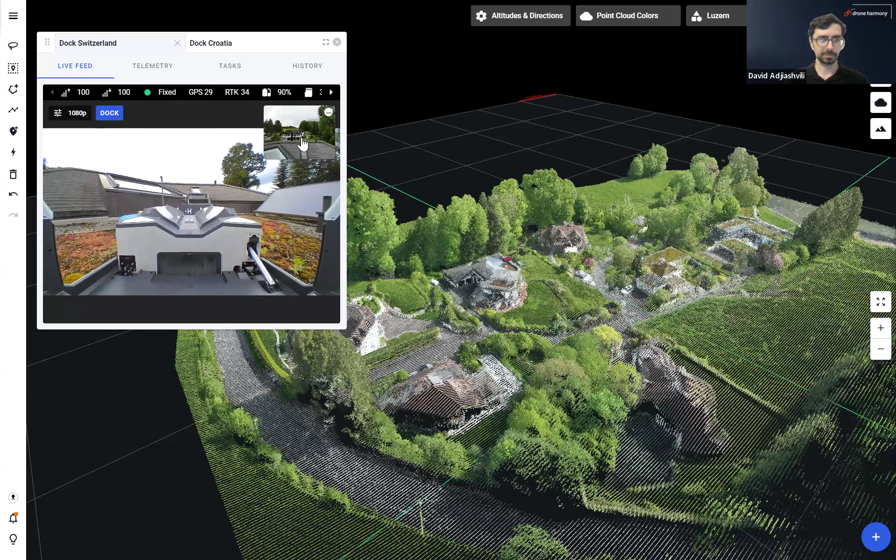Okay, we see the propeller spinning. That's perfect, so it will launch now. Okay, I can switch to FPV view again, and as usual you see how the drone is presented here in the 3D view. I know exactly where it is.

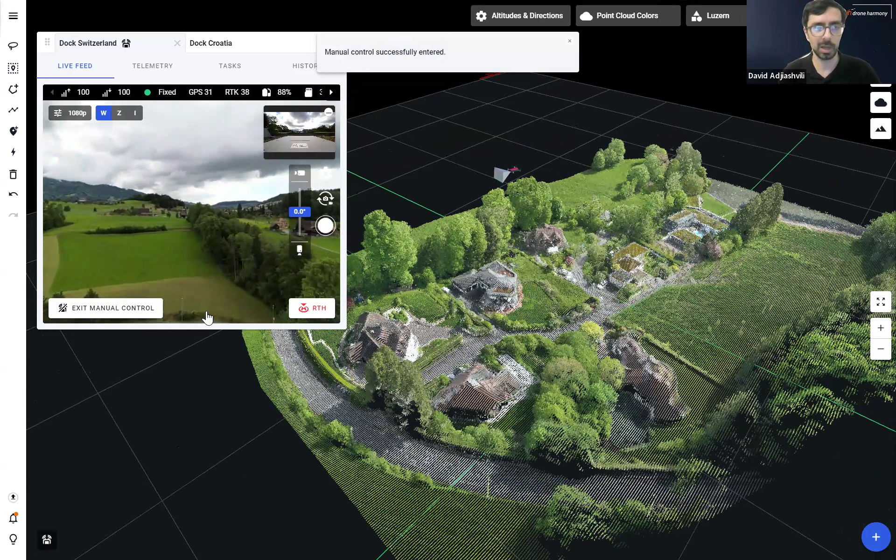Now what we're interested in doing is just manually controlling the drone, maybe flying it a little bit left and right, looking at some nice scenery, and appreciating how identical the interaction with the Dock 1 versus the Dock 2 is. There's really no difference in the interface or in the way we're interacting between the two systems. It's really transparent, you can only really tell if you look at the FPV view and note what kind of box it is, what kind of drone is sitting inside. Otherwise everything is practically identical.

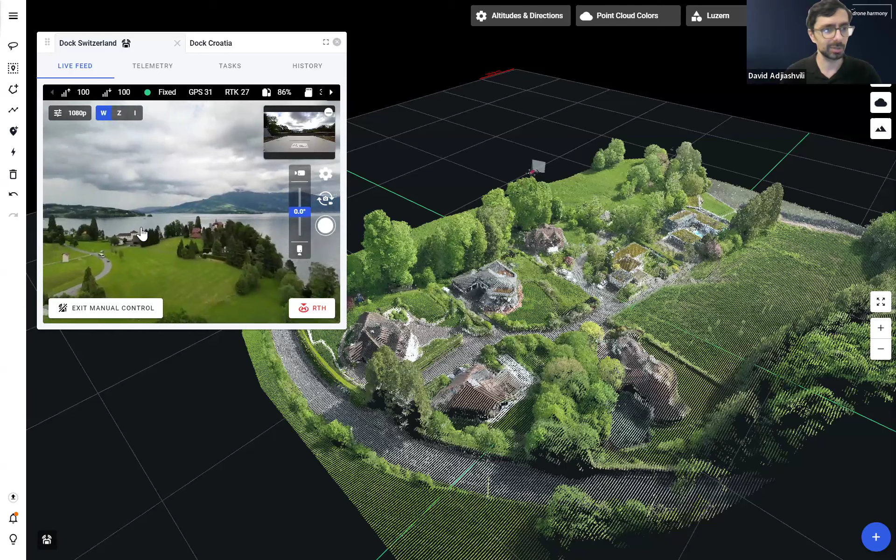And you are guiding this with your keyboard? Yeah, I'm guiding this with my keyboard. Here's me flying a little bit to the right, and now I'll fly a little bit to the left and forward, so it's really me guiding this. Again, you probably recognize this is a very beautiful area from just this view. Let me full screen this and zoom in to appreciate a beautiful boat on the Lucerne Lake. So again, this is pretty much the same as we've seen before, just in another use case.

So this is how easy it is whether it's a Dock 1 or a Dock 2, all systems are integrated exactly the same way. This is really functional for immediate inspection use cases, where you need to get up, take a quick look, and it's all manual. Exactly. Nice. I won't take any more time right now, I think we've seen a few use cases.

We've seen live flights, I'll just return this specific dock to home as well. And yeah, back to you, Alex.

Thanks for that, David. I love this view, when it's coming down from the bird's eye view onto the dock, and the dock opens up, it's very sci-fi. I love this.

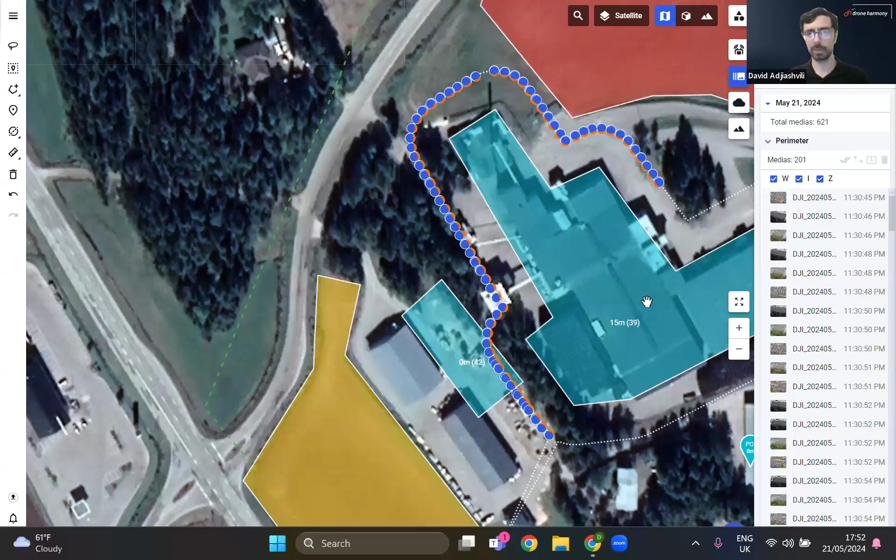This is exactly the same site we've been doing most of our flying in, the dock site in Finland. And what you'll see is we have a special layer within the software, a tab I can open with media. Media is images and videos captured during all of the flights done by this specific dock system. On the base level, it's sorted by date, so May 21st is today. I can open that up and see I have a total of 429 files available here - pictures, videos, etc.

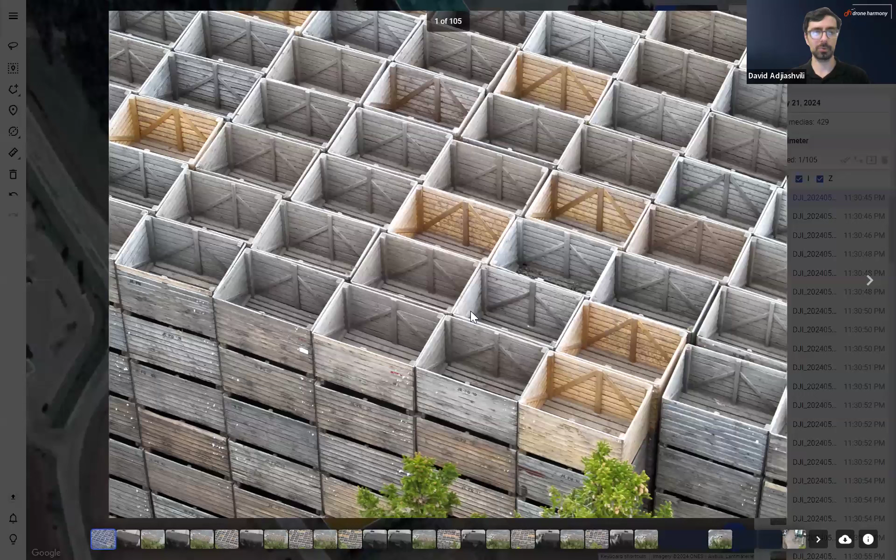This is the mission that we just flew. We can see the image icons start appearing here on the map, and as I hover over them, I see a little thumbnail. I can double click on the thumbnail and it will open up a full resolution version of it. So this is review of the data within the Drone Harmony system.

I can download the data of any single mission, or the data of any single day - it's all very easy to do. It's a simple download, like a download from a website. It will download a zip folder to your account. But beyond that, we also have options to integrate with other software platforms, and this is where things really get exciting, where we can send the data downstream to some software that processes the data, inspects the data, or uses it in some meaningful way for a specific use case.

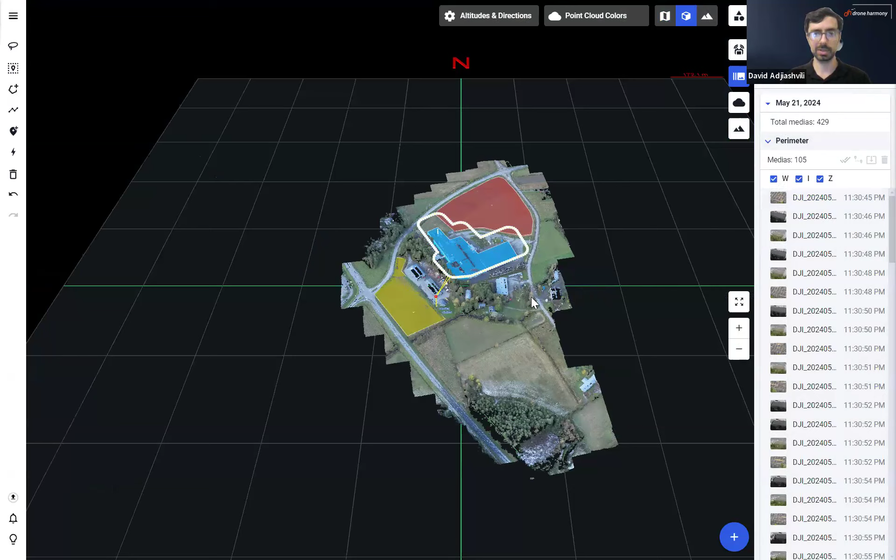Within here I can also do various things, like zoom in on different parts of the image in case I need a bit more resolution. Just quickly, let's look at a thermal image - that's how a thermal image would look from this specific angle. We can see the same data overlaid also in the 3D view, so it's available in both map and 3D view as a layer that appears on top of the virtual site. So this is just a quick demonstration of how the data is organized.

This is available here forever until we decide to delete it. So it's not that we need to view it today - we can view it tomorrow or whenever we have time. This is all managed and archived until the user chooses to do something with the data.

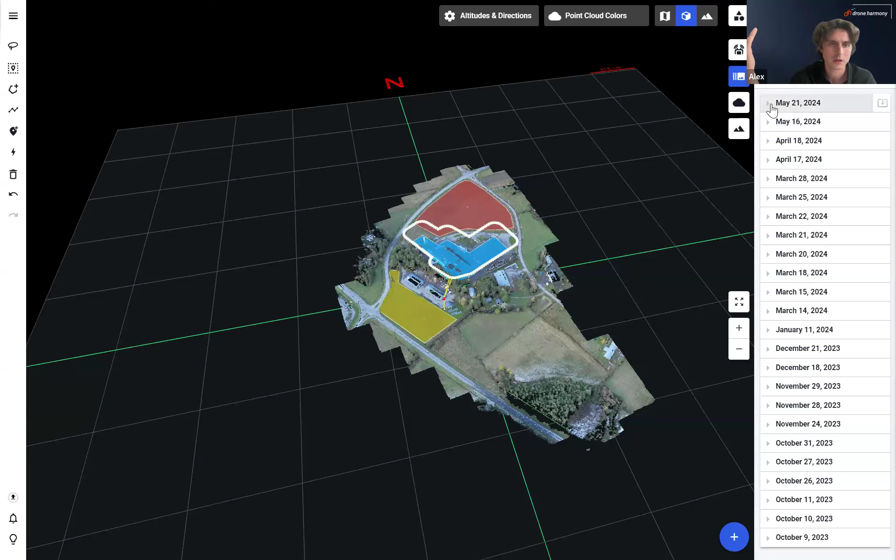And for those people performing 3D photogrammetry missions, the EXIF files of this data are already geotagged, so it can be put into photogrammetry platforms that stitch it together automatically, right? Absolutely, I can even show you how you can see the EXIF data here within.

Let me look, for example, at the wide camera only, since EXIF is primarily useful for things like photogrammetry wide cameras. So I can open the full EXIF metadata information here for this image, see its location, even things like file size, etc. This is all stored, and of course when we download the images they're enriched with this data, ready to process in any meaningful way for aerial data.

David, I think this is a good opportunity to talk about the integrations with some of our technology partners, where Drone Harmony potentially becomes a halfway house for data - it gets automatically stored into the cloud, and we create API connections with photogrammetry software and AI analysis software where they can create webhooks and API pulls from the Drone Harmony environment for these missions, able to process all of this automatically without people needing to push anything manually. We are a very proactive integrator of partners. Drone Harmony tries to maintain our expertise in data acquisition, not so much data processing. So we have great partners that we work with, and you don't necessarily have to change your existing processes.

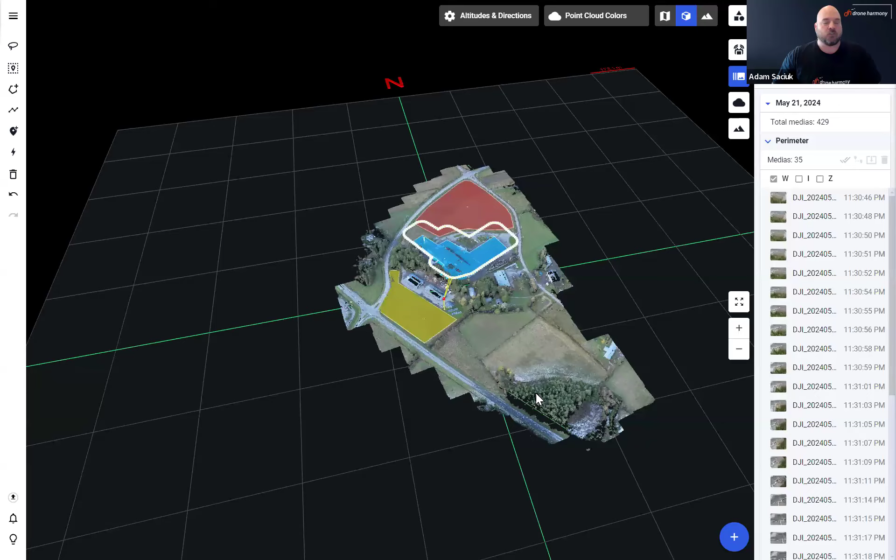While you've got the app open, there is a question about geofences and security. I didn't show that in the demo.

Would you be able to just draw a geofence and explain how we're able to restrict where the drone goes and what it does? We've got one there. Absolutely.

Yeah, of course. So there is a native geofence concept within the Drone Harmony system. The geofence is, in some sense, a critical part of any dock operation in the foreseen future, just because of the nature of these automated operations. The idea is to always have a remote operation situation where we don't necessarily have a visual observer or anything like that. So having a geofence is very important for safety.

In Drone Harmony, you can outline geofences. This is an example of a geofence that you see here, me highlighting right now. Geofences can be created within the system, and basically what they do is lock all the operations of the dock within that confined area.

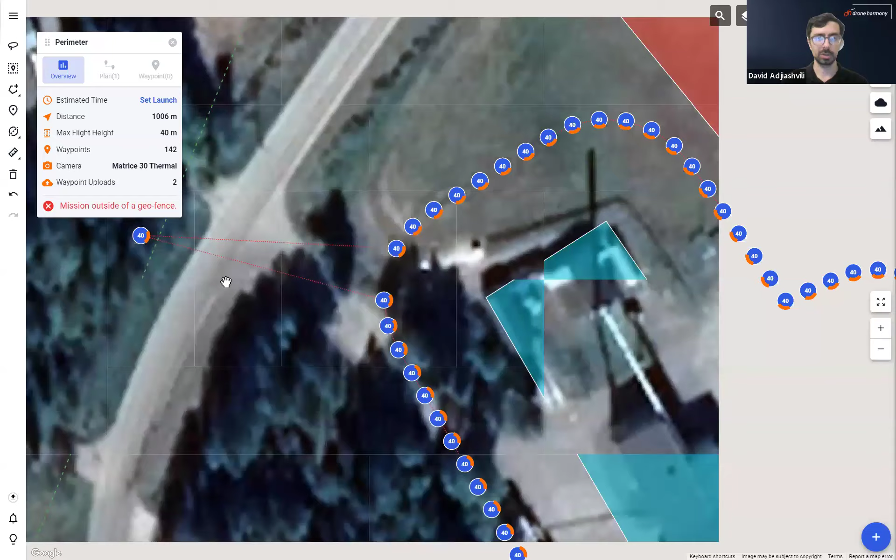So I can show you what would happen, for example, if I took this little mission here, composed of many little waypoints, and I tried to move one of the waypoints out of the geofence. You can quickly see how this mission is now violating the geofence. It tells me that immediately, and it won't let me launch this mission because this geofence is not allowed to be violated for this specific site. If I move it just a little bit in, you see how it immediately becomes a valid mission again.

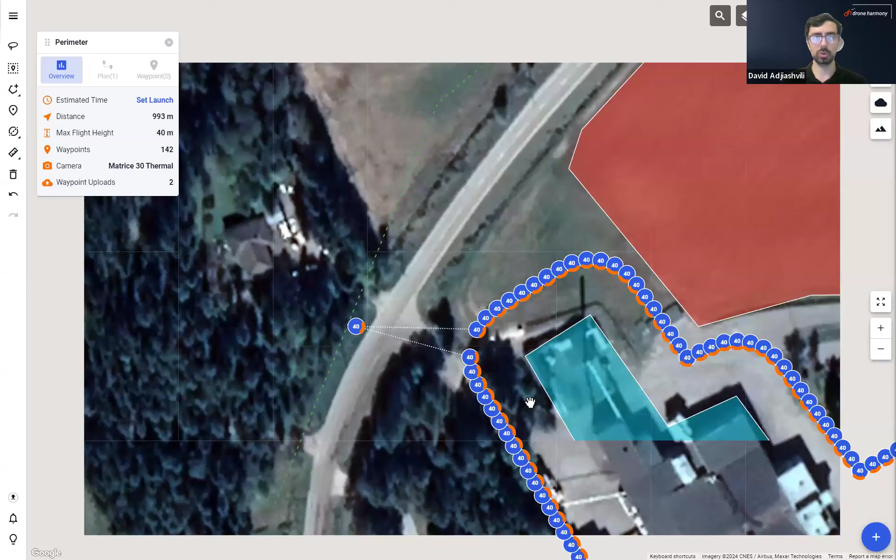So in Drone Harmony, you can create inclusion zones like this geofence. You can also create exclusion zones, no-fly zones practically, where you are not allowed to fly. And we also have a structure of access to these kinds of features, and it's only available to the admins of the system to change these kinds of things, just because it's such a safety critical feature.

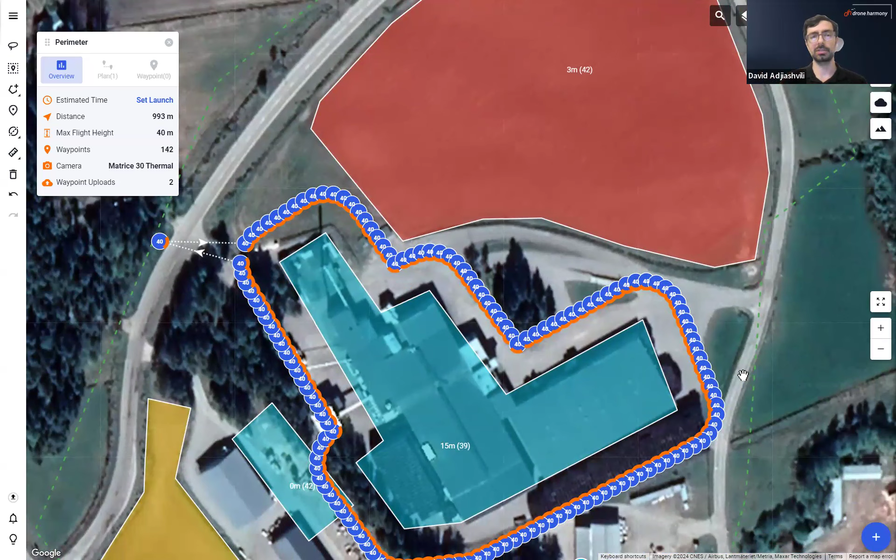So operators and observers, which are concepts within Drone Harmony for people who just need to operate the system or just view data, view live feeds, they actually have no access to changing the geofence. So that's something that's available for the admin.